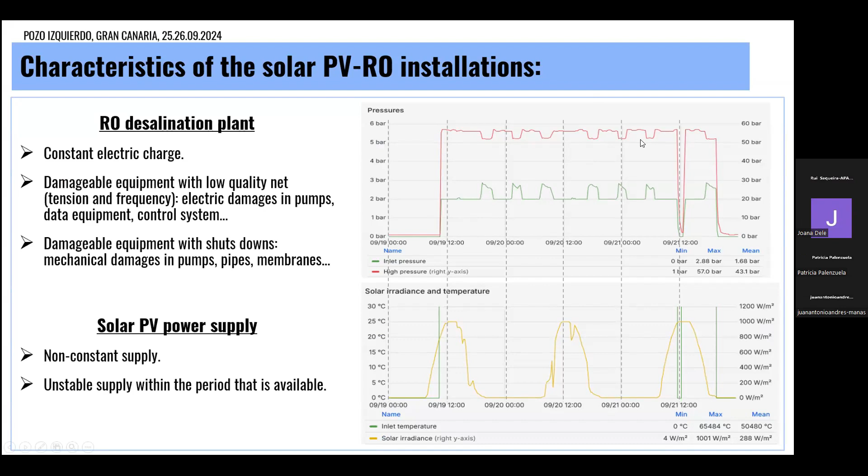If we take into account the PV, the reverse osmosis is a constant charge, you can see it here. So we have this small desalination unit that we have here in Pozo Izquierdo, and this is the high pressure pump. We have a constant charge as the desalination unit is working. This is the intake pump.

On the other hand, in the PV solar installation, we have this source available depending on the irradiation. So how can we match this, having a constant charge with a non-constant and non-stable energy source?

On one hand, we have equipment within the solar desalination unit that is very sensitive to low quality of the net, with tension and frequency, so we can damage our pumps or control system if we don't have a good quality net. We can also have physical damage to our equipment, like in pumps, if we do starts and stops, shutdowns and starts very suddenly, without controlling or doing it smoothly.

So what are the different possibilities? How can we match this constant charge? How can we supply a non-constant and non-stable energy supply without damaging our unit and producing the water that we may need? There are two main possibilities: off-grid installations and on-grid.

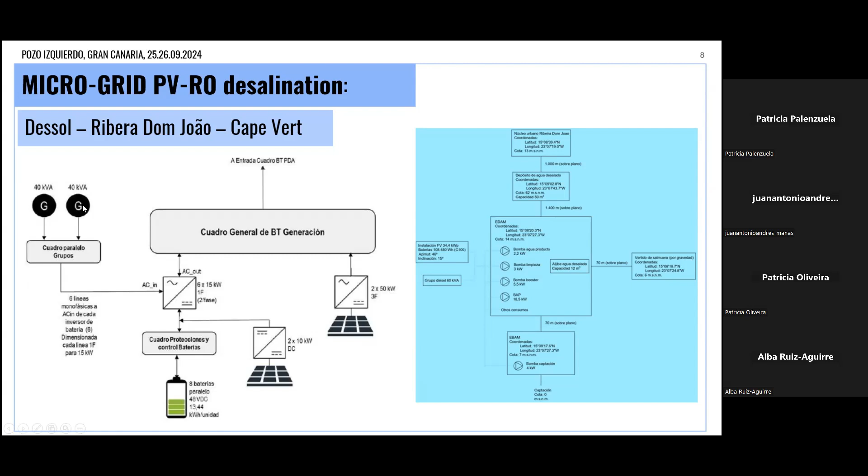And we can have external support either by engines or grid connected. There are different possibilities. On the other hand, we have a supply of PV source for the system itself, but this is the heart of the system. We need to create this microgrid because we have equipment that is very sensitive to low quality energy, either in frequency or intensity.

So what does this mean in reality? We have to create a three-phase microgrid, so we need three converters, three solars. And we need the PV power only to create it. Obviously, this energy will also be used for the desalination unit when needed, but it's not the priority. The priority is to create this stable microgrid.

And this is for a little unit of 120 liter cubes per day, so imagine if we scale up to 1,000 liter cubes per day, or 16,000 - it can be very difficult to achieve this with PV solar. On the other hand, we have these PV modules to supply the energy needed for the unit.

At the same time, all this equipment must be communicated through industrial systems, and this is not as easy as we can think, because all the equipment is commercial equipment, and they are not all built to be connected with different brand equipment, with different suppliers. So it takes time to do this configuration - it's not as easy as we could think.

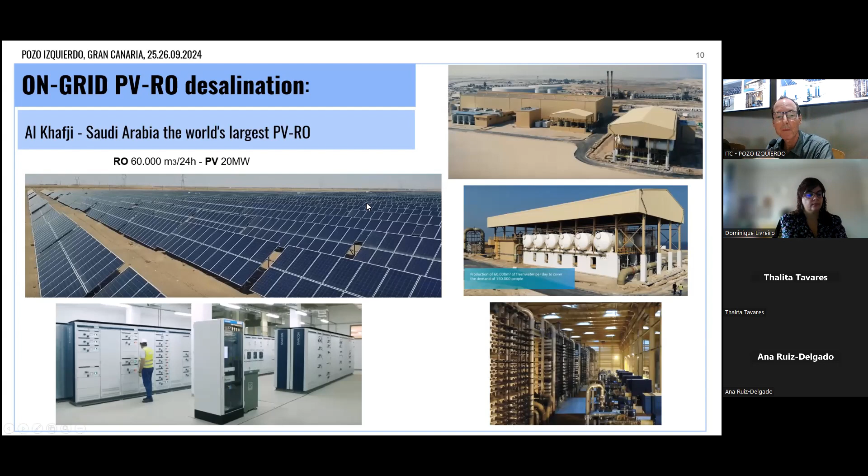But it's not the same idea as we shared before. You see the size of the desalination unit is enormous. All this is for the unit, the desalination plant, and for the PV system, but it's a part - it's not a whole system.

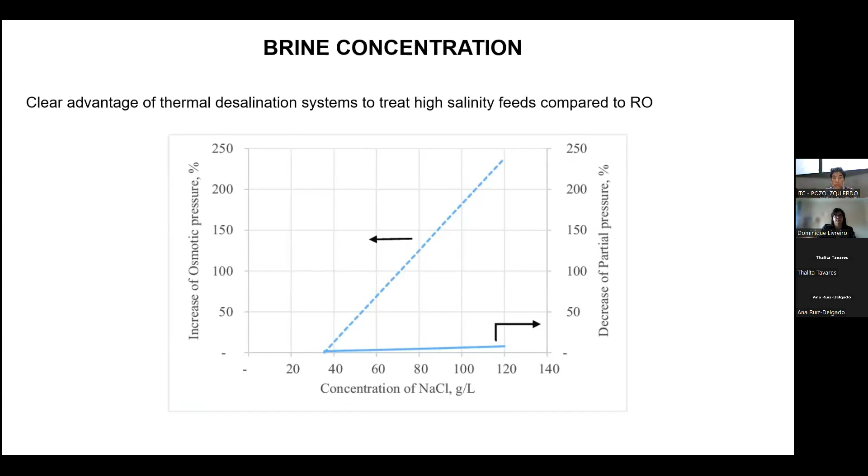with the salinity, so as salinity increases, the vapor pressure decreases much less. So thermal desalination technologies are less sensitive to the increase of feed salinity.

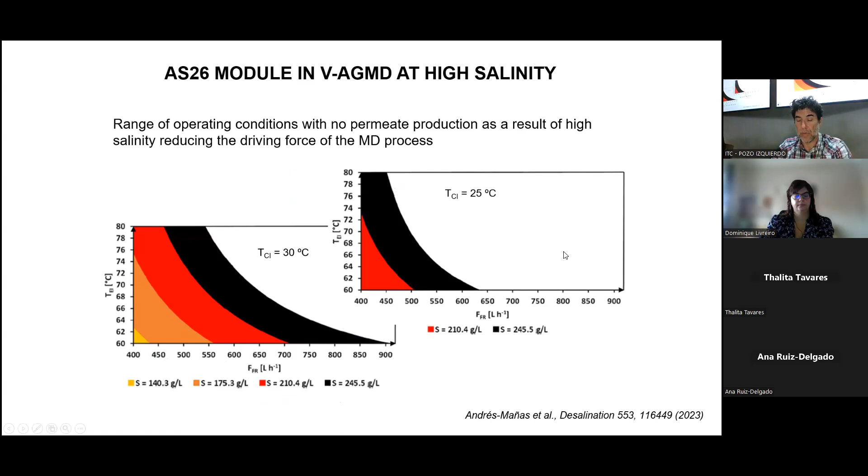So we need to operate at much larger feed flow rates. And specific thermal energy consumption, as an effect of the flux decreasing with the feed salinity, then specific thermal energy consumption increases. And we have an interesting effect that links with the previous presentation in the first fast track school.

And how do we reach this brine concentration? Operating in batch mode, so recirculating the feed. It goes out and then goes back again, so it keeps concentrating, because the recovery ratio in membrane distillation is low. It's typically not more than 10%. So we need to recirculate to achieve higher concentration.

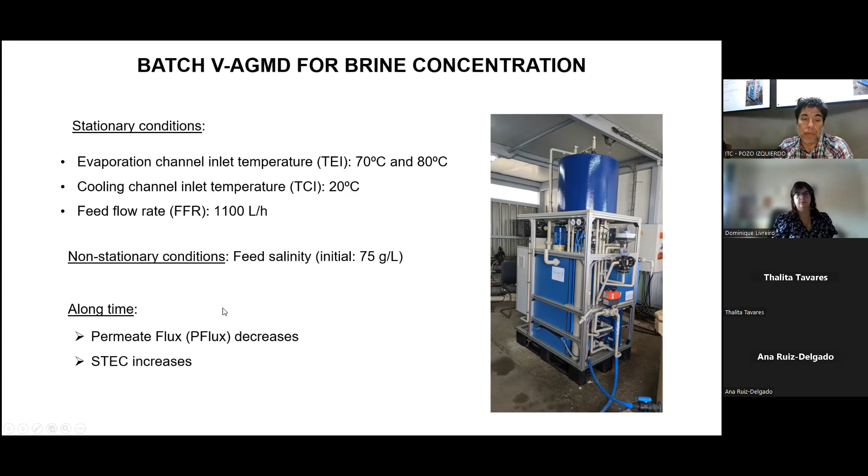And of course, the feed salinity is increasing. We start at 75 grams per liter. And over time, permeate flux will decrease and the specific thermal energy consumption will increase as an effect of the feed salinity. And we see here how the flux decreases.

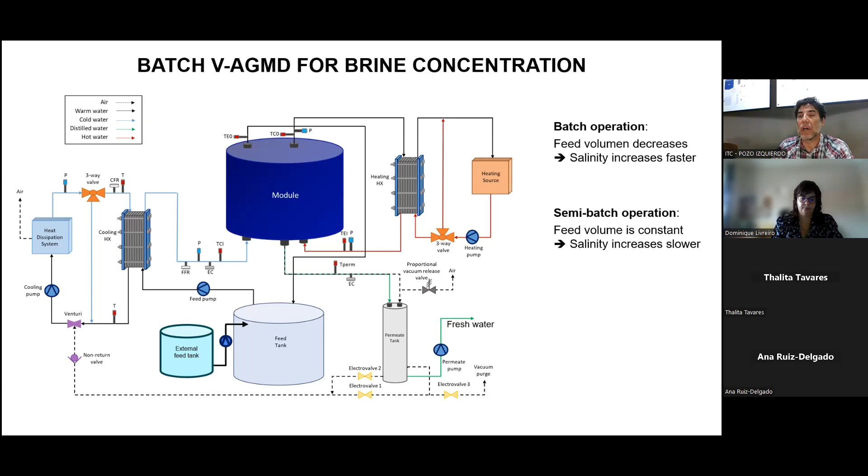And this is an interesting thing we did previous to the experiments in Evora, to see whether this would be a good strategy for brine concentration. We see it decreases the increase of salinity with time in semi-batch, because we are adding feed water, the 75 grams per liter, mixing it with the brine. And the flux over time, with salinity, we see that experiments take longer because it takes much longer to reach the final salinity, and then we have more added flux.

But of course, this is to check the permeate flux with salinity is most, and there's not a big difference. The difference is because of temperature, but it's not a big difference between batch and semi-batch. And the specific thermal energy consumption on the semi-batch is kept lower over time, again because the salinity increases slower.

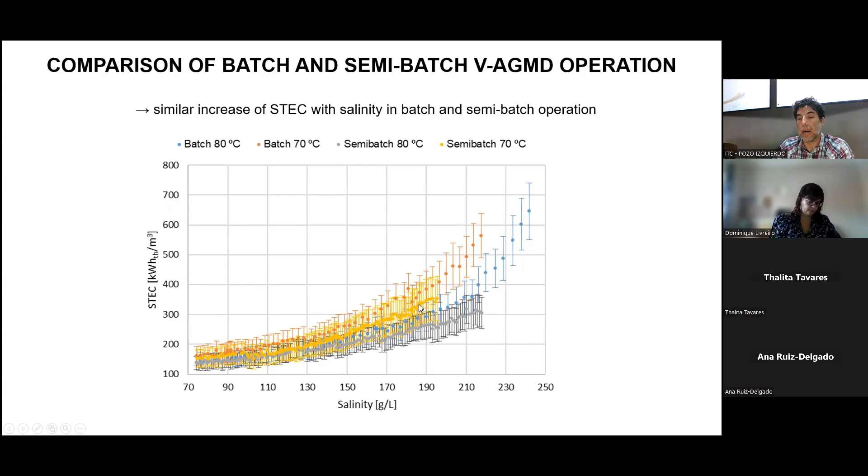And comparing with salinity, it's more or less the same for batch and semi-batch, though the error bars are large. And the cumulative specific thermal energy consumption is again kept lower in semi-batch. This is because of the flux, as you see the thermal energy demand is very similar between batch and semi-batch. So the difference is that the specific thermal energy consumption is divided by the production, by the flux.

So the results: if we want to reach a final salinity of 196 grams per liter, we see that in semi-batch we have more or less the same specific thermal energy consumption as in batch. We produce more, but we also need much longer time. And if the goal is to produce a certain amount of permeate, then we reach that amount in less time with the semi-batch operation, using less specific thermal energy consumption, although the final salinity is lower, again because we are buffering it.

So it's interesting to consider this semi-batch operation for brine concentration. It takes more time, but depending on whether we want to recover more water, this is a good way of doing it.

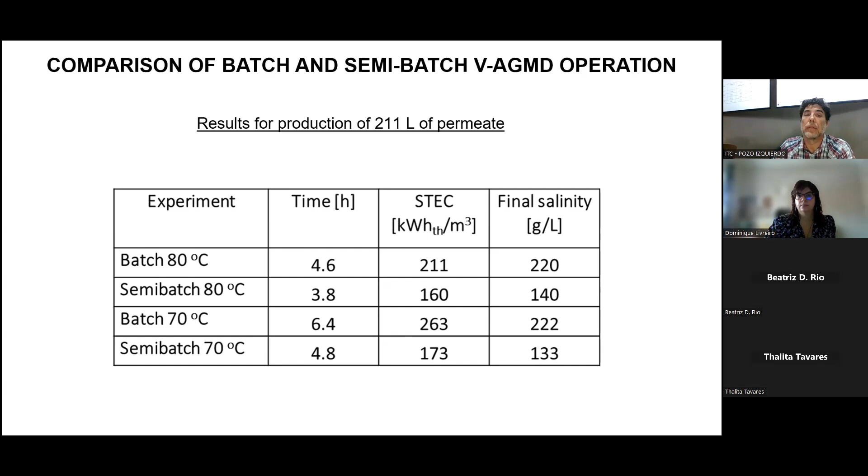And okay, this is now a comparison with osmotically assisted reverse osmosis. These are real results obtained experimentally for the vacuum enhanced air gap membrane distillation, for specific thermal energy consumption operating in steady state, or cumulative. The specific electric energy consumption was also calculated, and it's always less than 0.5 kilowatt hour per cubic meter. This is the cumulative specific thermal energy consumption over time, as salinity is increasing.

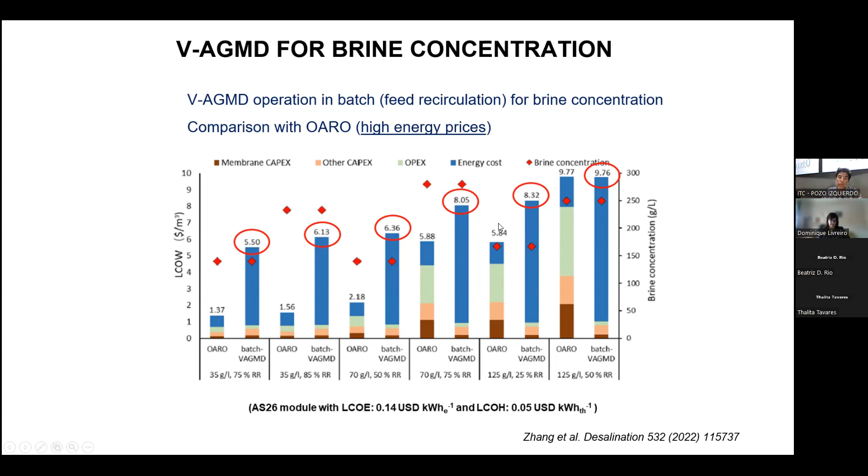But this is calculated with simulations. We don't have real data of osmotically assisted RO when we did this comparison.

We evaluated this compared with the rest. All these are spiral wound modules, comparing flux and GOR, and here we have this 4 effect unit: very large flux, but of course the energy consumption reflects 4 effects. It cannot have a GOR larger than 4. We would need to increase the number of effects to reach the specific energy consumption of the long residence time spiral wound modules, but we have a very large flux comparable to the short air gap membrane distillation spiral wound modules. So this merits a comparison for brine concentration in this scheme.

This is what we did in the Intelwatt European project, which is about finishing this month, treating high salinity brines from a mine effluent. It was a combination of reverse electrodialysis and membrane distillation, but I won't get into detail of this project. You can find it on the internet.

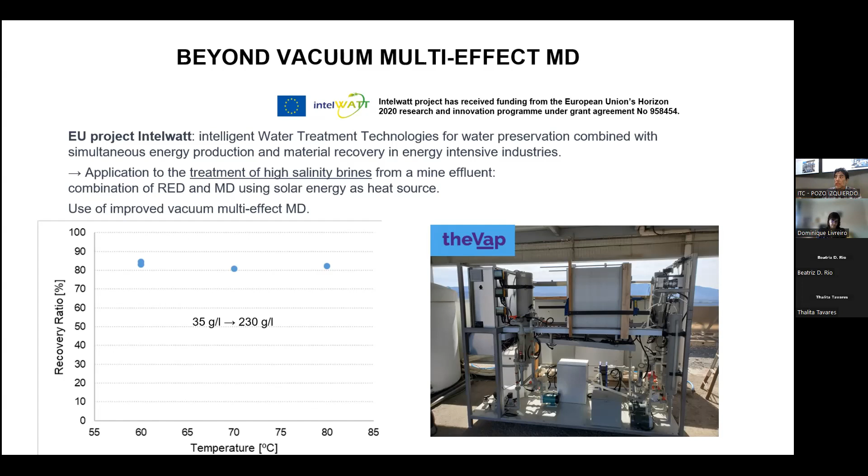That's the next step. We have already tried with graphene oxide to improve the membranes for more resistance to fouling. This is work done by the University of Manchester, adding graphene oxide layers to membranes, doing the usual fouling experiments over 72 hours.

How are we on time? You have 15 minutes. All right.

A long run of 72 hours, then rinsing with hot water for 30 minutes is the typical experimental fouling protocol. With PVDF membrane, the Durapore commercial membrane, we see we have foulants, of course. We have humic acid and paraffin oil, and we see the flux decreases because there is fouling. With PVDF with PDA, it's more resistant, but still you see a decrease of the flux.

And with the graphene oxide, the flux is kept more constant. So there is an increase of fouling resistance using graphene oxide, and the flux decay due to fouling is mitigated. There is some membrane wetting, but membrane wetting is reversible.

So this is what is going to be tried in the next months using this facility of the Intelwatt project: first, the graphene oxide membranes, and meanwhile we will work on changing the module to a membrane-less module, so we can have less resistance. It's more like a multi-effect distillation plant, based on thin layer operation.

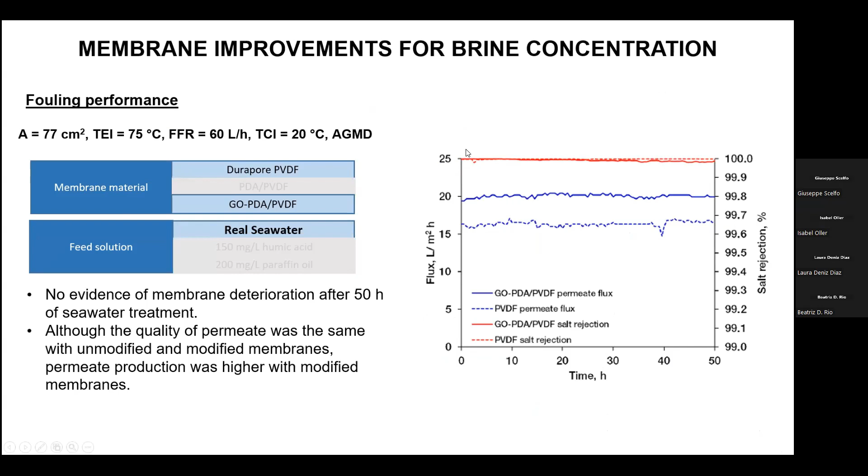Okay, this is the summary of the conclusions of the tests. With graphene oxide, we see the flux is larger and kept quite stable a long time. But this is what is important in our context: using solar energy, we want the highest thermal efficiency of membrane distillation.

Here we are comparing the different membranes: the polyethylene membrane, which is the standard membrane used by the Aquastill modules, the PVDF membrane without graphene oxide, and with graphene oxide. We see an increase of flux constant for air gap and also for vacuum enhanced air gap, a decrease of the specific thermal energy consumption, quite significant for the vacuum enhanced air gap membrane distillation, and the salt rejection factor is also increased.

One of the issues with vacuum assisted air gap membrane distillation is a slight decrease of the salt rejection factor, because of the effect of the pressure. On the other side, there is a negative pressure that pushes against the liquid entry pressure of the membrane. With vacuum and graphene oxide, this is mitigated, and we can keep the same salt rejection factor as in air gap. So that's another advantage of the graphene oxide coatings.

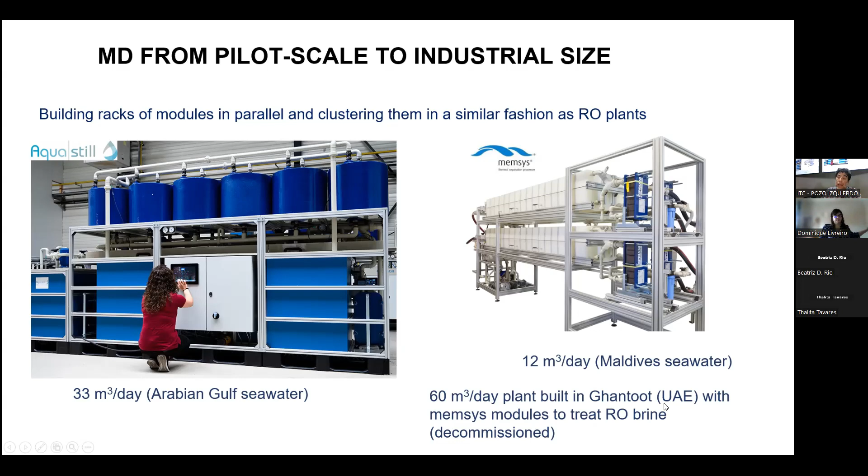And with hollow fiber modules, this is a funny story because Korea wanted to have a large membrane distillation plant, but with their own technology, and they only can build hollow fiber modules. So they have this very large plant, 400 cubic meters per day with hollow fiber modules. They don't have internal heat recovery, so the energy consumption is crazy.

They have covered it with steam ejectors to recover some part of the heat, but it's not really feasible. They have good fluxes, but the energy consumption is very large. They operate with vacuum and thermal vapor compression.

Okay, coupling membrane distillation with direct solar heat. There is a lot of work now advancing state of the art on this concept. That has the advantage that you save on solar collectors and reduce the thermal losses of membrane distillation. The idea is that the feed water is heated directly by the solar radiation, so you integrate a membrane in a solar collector. This has been done with several configurations: vacuum, direct contact, air gap, or even vacuum-assisted air gap, and also with hollow fibers.

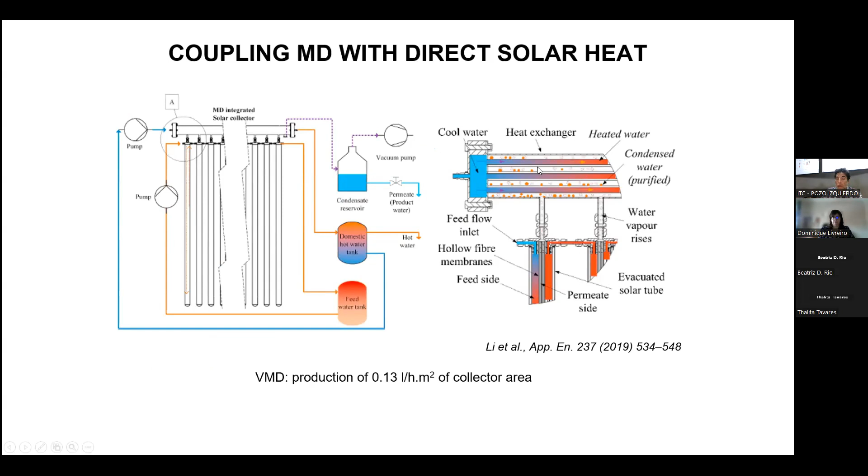This configuration is with evacuated tube collectors. We introduce a membrane in an evacuated tube collector, and in this case it's vacuum membrane distillation, but you can have it also with direct contact. You have the membranes inside, and this is an evacuated tube collector. Well, in this case, not evacuated because there is liquid inside. So this is like a CPC.

The problem here is that the solar collection area is restricted to the membrane area, and the velocity required for heating in a collector is much lower than the optimum velocity at the membrane surface. So there is going to be a problem if you operate at the velocity needed to reach the required temperature. Then, by operating at very low velocity, polarization on the membrane is going to kill you.

And if you operate at the right velocity to avoid the polarization, then you don't have physical time to heat up the feed. So the solution is you need to extend the collection surface without membrane to have some preheating and then reach the membrane surface.

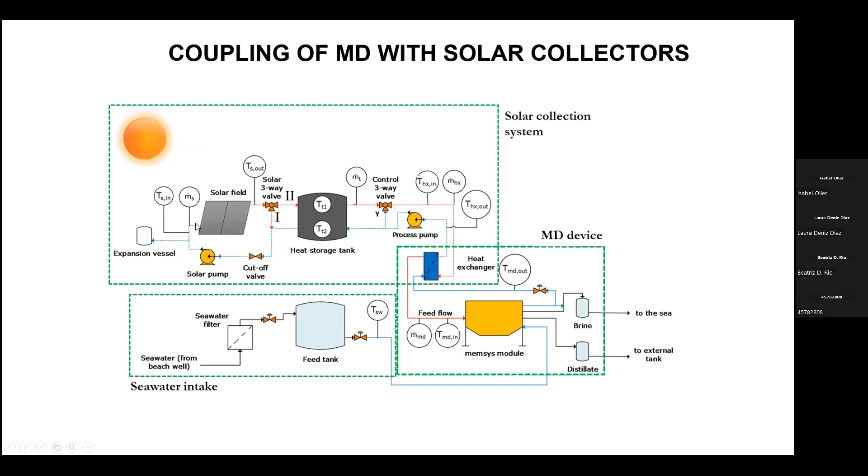So you're not really avoiding a collector because the membrane is only one part of the collector. So that's not really saving. And you're losing the capacity of buffering, which is the big advantage of having a separate solar field with a heat storage tank. You can buffer the feed and operate at constant or more stationary feed temperature. And this is a big advantage that is gone with the direct solar membrane distillation.

So I think there's a lot of research going on that, but I don't think it has good prospects, and we should stick to our concept of having a separate solar field and a separate membrane distillation operating at their own optimum conditions, and then the interface, which is a heat storage, a heat exchanger, and the heat storage that allows to play and optimize the operation and get the most of the solar field.

Another interesting concept is coupling membrane distillation with heat pumps. Why? Because we need heat and we need cooling, so we can integrate a heat pump. In this concept, you have solar energy and the cooling required for the membrane distillation. So this is an absorption heat pump coupled with a membrane distillation unit.

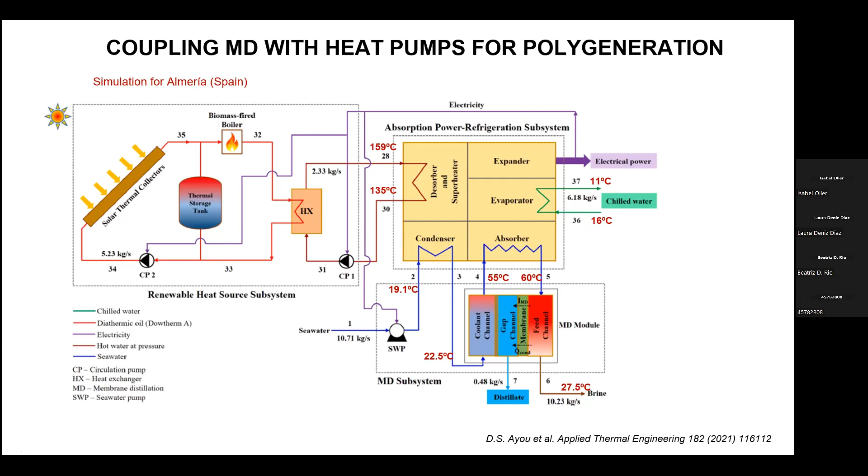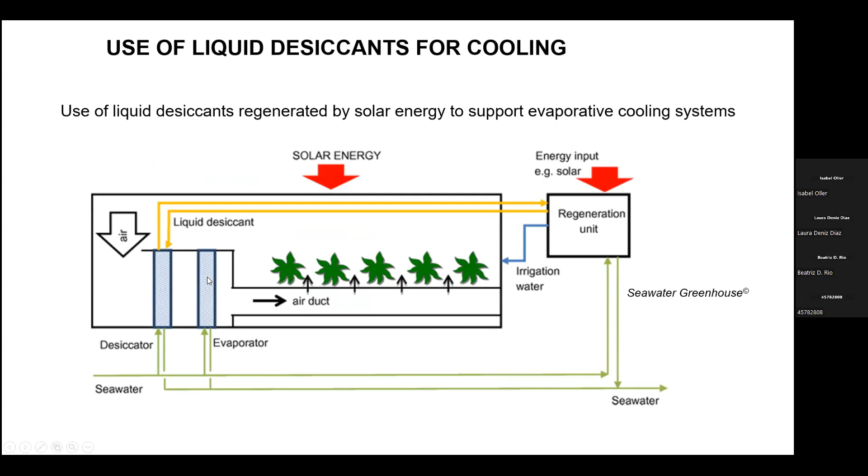And there are also the concepts of solar absorption cooling. Chemical absorption has been proposed for solar cooling using saline solutions regenerated by thermal desalination technologies. Here liquid desiccants come into play, and we have used them for evaporative cooling and regenerated by membrane distillation. This is in the context of the seawater greenhouse, where we did a theoretical study of using a liquid desiccant regenerated with solar-powered membrane distillation.

The problem is that the solutions that work well as a liquid desiccant are those with the lower water activity, and they require the highest energy for membrane distillation. So there is this problem: calcium chloride and magnesium chloride have low water activity and low flux in membrane distillation, whereas when the water activity is high, like sodium chloride, then you have a much larger distillate flux. So it's not the perfect marriage, but it's something that can be studied for liquid desiccants.

There are other alternatives for solar cooling combined with membrane distillation that we could study, and then we stop here. There are also applications of membrane distillation for regenerating industrial solutions and for hydrogen production, green hydrogen. But I think we saw the green hydrogen in the first edition of the course, and the industrial wastewater work was done by Alma, who worked a lot on that, but I cannot present it. And this is the people that have worked on these topics of this presentation. Any question, I'll be happy to answer.

I have one question. You have concentrated the information in the presentation. I wanted to ask you about perspectives: how do you see the possibility of further reducing energy consumption in membrane distillation? There is a driving force, a temperature driving force, which somehow limits the lowering of energy consumption. Is there any hope that new membranes or new configurations may help reducing this driving force to enhance efficiency?

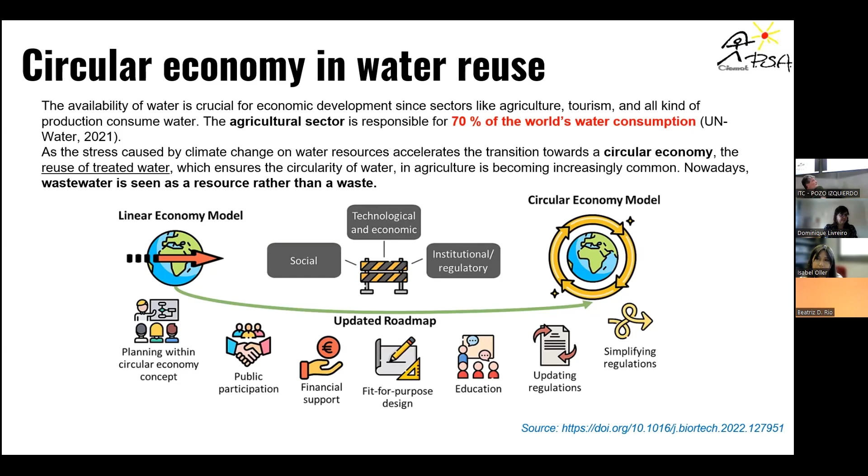And that implies taking into account different actors, not only from the technical and economic point of view, but social engagement and the institutional and regulatory framework is also highly important in this issue. There is a new circular economy action plan launched by the European Commission, in which they connect the agricultural, industrial, and municipal systems, in which water is everywhere, let's say. And of course, water reuse in agriculture is included in the food, water, and nutrient product value chain in this new plan, so it's highly important.

There are a lot of barriers that prevent the widespread use of reclaimed water in agriculture: technological, economical, institutional, and social barriers. There are many actions being done to overcome these barriers, but I would like to draw your attention to how important education is, not only regulation, but also social education and public participation, as important actions to achieve wastewater reuse, at least in Europe.

For that reuse, we have water microbial contamination that we have to tackle. It's not only the presence of bacteria, viruses, protozoa, and the stomach problems and cholera problems regarding E. coli and the presence of these water pathogens when we use wastewater as a water source.

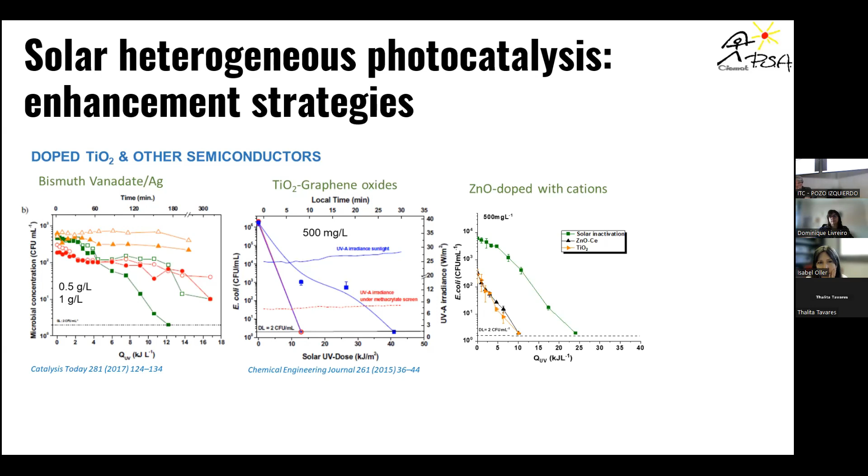The next presentation, I think, will go deeper into this, so I won't go further, just leaving you some examples of these nano-semiconductors being developed nowadays. But the thing is, as I also said in the first Fast Track school, there is not yet any new photocatalyst developed or synthesized with better performance than titanium dioxide.

So the future in heterogeneous photocatalysis would be the immobilization of these photocatalysts in some supported materials, allowing us to use the nano-photocatalysts without them being diluted or in suspension in the water, which would require separation.

We have been working a lot not only with titanium dioxide but also with iron in a zerovalent form. Some people are working on giving a second use to wastes that are rich in iron, which can be used as zerovalent iron, working as a heterogeneous phase.

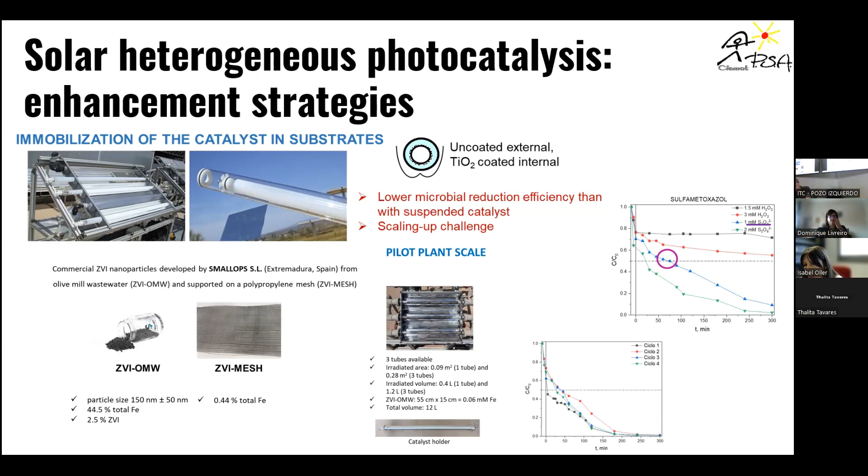So the important thing with this kind of supported photocatalyst is that you can reuse it without removing the catalyst and the support material. In the graphic below, you can see the reuse of this mesh over 4 cycles, and more or less the efficiency is maintained.

Another advance, or step forward, is the state of the art use of oxidants for UV systems already installed in wastewater treatment plants, or new solar systems, solar photoreactors, which we'll discuss a little more later.

So the idea is that if we add hydrogen peroxide, even chlorine, persulfate, or peroxymonosulfate, we can produce other radicals besides hydroxyl radicals, like sulfate radicals or chloride radicals. These may not be more energetic than hydroxyl radicals, but similar, though more stable in water, so we can get better results in the medium to long term.

So when we use chlorine or UVC, which are the state of the art and commercially available technologies, we can produce toxic intermediates like trihalomethanes and haloacetic acids, which are carcinogenic.

But if we combine solar energy with UV and free chlorine, or instead use persulfate or hydrogen peroxide as oxidants, we can eliminate these trihalomethanes, these intermediate products, as soon as they are produced. So we can go further and improve these systems, always considering what is already installed in wastewater treatment plants and taking advantage of it, which normally is UVC and ozonation as tertiary treatment, or nowadays already quaternary treatment for disinfection.

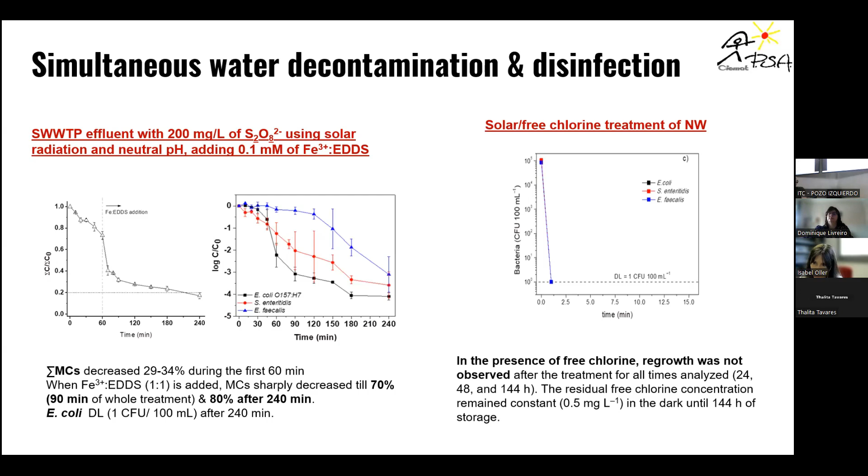There are also some advances or improvements in the solar photo-Fenton system - this is homogeneous photocatalysis. We have iron and hydrogen peroxide, so we produce hydroxyl radicals in the bulk of the reaction in the water. We don't need to separate anything because this is not a heterogeneous phase, it's homogeneous. The thing is that normally the photo-Fenton process is optimum at acid pH.

So when we are thinking of applying the photo-Fenton process for the elimination of microcontaminants in the effluent of a municipal wastewater treatment plant, reducing the pH and then increasing it afterwards seems to make no sense, using reagents like sodium hydroxide or acid, which would be an extra cost for the reagents.

So if we use a complexing agent, such as EDDS - here I leave you some of them, could be EDDS, EDTA, oxalate, citrate - there are a lot used and tested in the publications in the bibliography. We can trap the iron and avoid its precipitation at neutral pH, so then we can apply the photo-Fenton process at neutral pH.

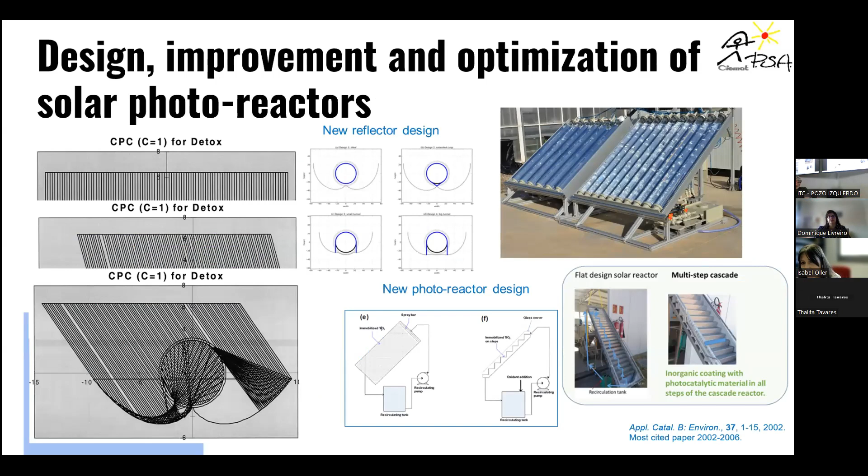Just to let you know the advances in the state of the art in photoreactors - as you can see on the right-hand side, there are multi-step cascade photoreactors that are open photoreactors. The other advanced photoreactors my colleague Lena is going to speak to you about, so I'm not going to enter into that here.

But I wanted to speak to you about the raceway pond reactors, which mainly come from our collaboration with the University of Almeria. These are low-cost photoreactors that can be easily used when you want to treat with solar energy and some oxidants at a bigger scale and with less cost, for large amounts of effluent from a municipal wastewater treatment plant.

Just to finish with the example I told you, I leave you this - I'm not going into depth, just for those interested you can contact me after - but this is a demonstration project in which, with Esamur in the Murcia region in Spain, we have put together a demo site focused on the integration of three systems: an upflow anaerobic sludge blanket system, vertical and horizontal wetland, and then the raceway pond reactor for the quaternary treatment.

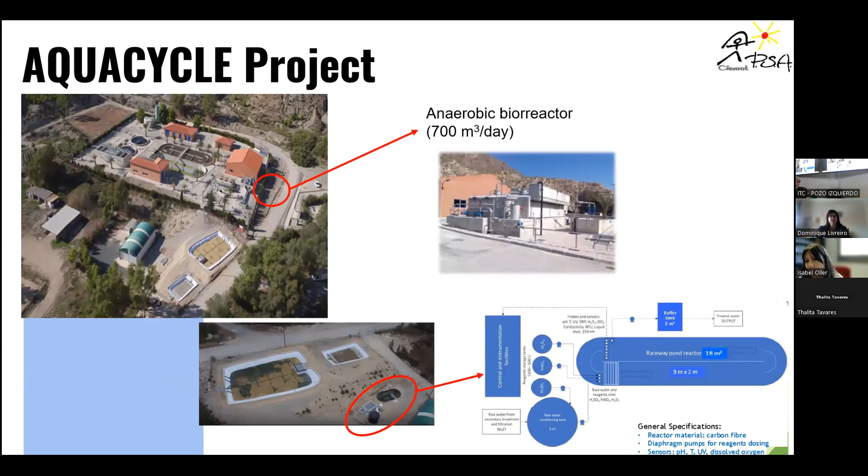So these are some pictures of the facility, and here you also have the raceway pond reactor for treating up to 5 cubic meters per day of water. These are the contaminants and microorganisms we have followed, and this is quite new. I leave you only the results here to let you know which pathogens we have inactivated.

The oxidant that we have mainly used is hydroxyl, so hydrogen peroxide to produce the hydroxyl radicals. This is the pictures of the wetlands and raceway pond reactor.

We have obtained the elimination of 50% of the contaminants of emerging concern, and we have also attained the disinfection process. I leave you here the results also, mainly to let you know that we have effective treatment and no regrowth of bacteria after 48 hours of stop.

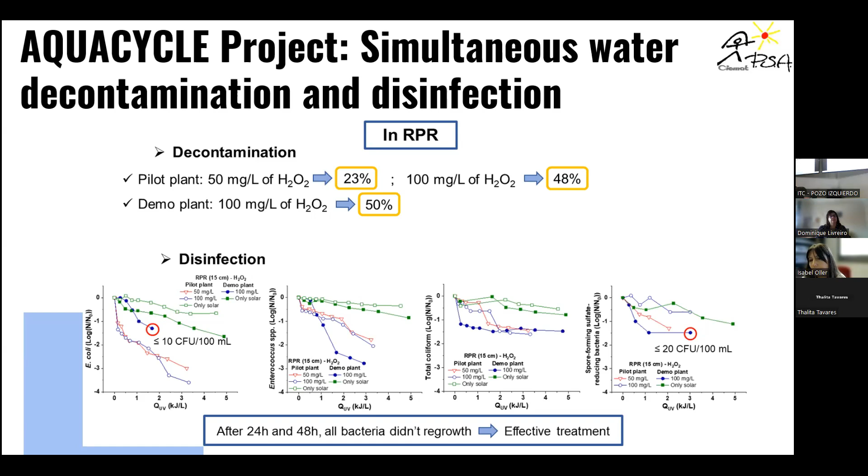The first one is again about perspectives. First of all, is there a kind of design criteria, in terms of, for example, milligrams of removed contaminant per square meter of collector? And if so, are there numbers or figures for the current collectors, and target figures for future scale up and full scale implementation?

That's a very good question, Andrea, thank you very much. As you know, there are not so many ISO rules or protocols well established yet for the wastewater or reclamation wastewater field. But yes, we already have a lot of demo sites, and we have those numbers. We can establish the target of microcontaminants and pathogens to be eliminated, and even the amount of oxidant that will be required. We have also been working in semi-batch, semi-continuous flow.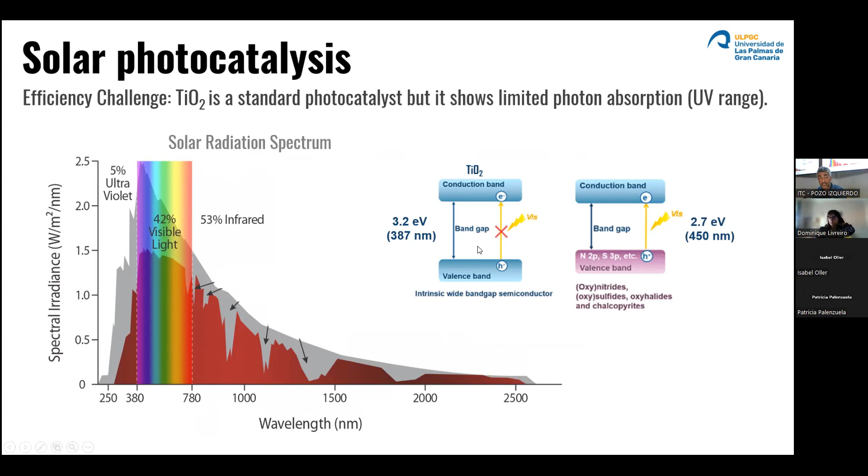There's been a lot of work done in photocatalysis materials strategies to try to reduce that band gap and be able to harvest photons in the visible range, which is about 42% of the photon emission spectrum. There's been quite a lot of strategies done to manipulate materials to try to take advantage of these low energy photons. These are the typical examples, if you want.

Doping was mentioned also in Isabel's talk. What it does is introduce stepping stones in that kind of bridge, so the photons can use it to jump, and then you don't need that much energy anymore to reach the conduction band. There's loads of them. You can play with the stoichiometry of materials to try to reduce those band gaps, because they are affected by the chemistry structure and all these properties.

You can also use dyes on the surface of the materials that can absorb visible light photons and then transfer them into the semiconductor. So there's loads of these kind of strategies. Heterojunctions are actually very popular. There's two different materials, two different semiconductors that join together. They both hopefully absorb photons, or at least one of them does, and what they can do is separate the charges efficiently, the electrons and holes, so that you can have them in different places and there's no recombination. So you increase the photocatalytic efficiency.

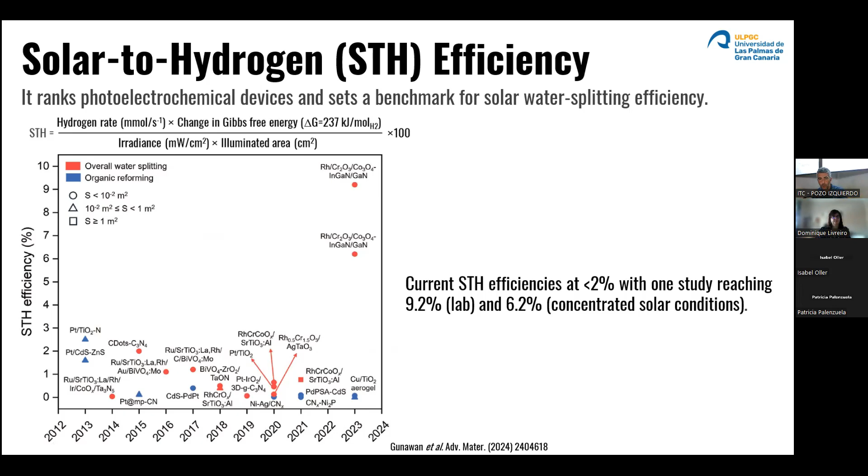There's one example of efficient production for hydrogen in here, which is actually the same paper. They claim efficiencies of 9.2% in the lab - that's with intense lamps - and 6.2% for concentrated solar. I'll give you a bit of this flavor as you will see the example for hydrogen in here.

I didn't know there was sound, but I will show you what they're doing there. It's actually rhodium chromium oxide, supported on indium gallium nitride substrate. That's for the hydrogen evolution, and then there's also cobalt oxide for oxygen evolution.

You can see the filtered light in there. You can see all these bubbles. Don't ask me how they separate the hydrogen and the oxygen - it looks like they evolve in the same vessel. And certainly the materials, both sides of this hydrogen and oxygen, are all on the same kind of nano needles, nano wires, they call it.

You can see the changes in band gap as you dope gallium nitride with indium, and there's actually heat involved as well. They say there's an optimum temperature at 70 degrees, and above that temperature, apparently, you enhance the recombination of hydrogen and oxygen. The test lasted 74 hours.

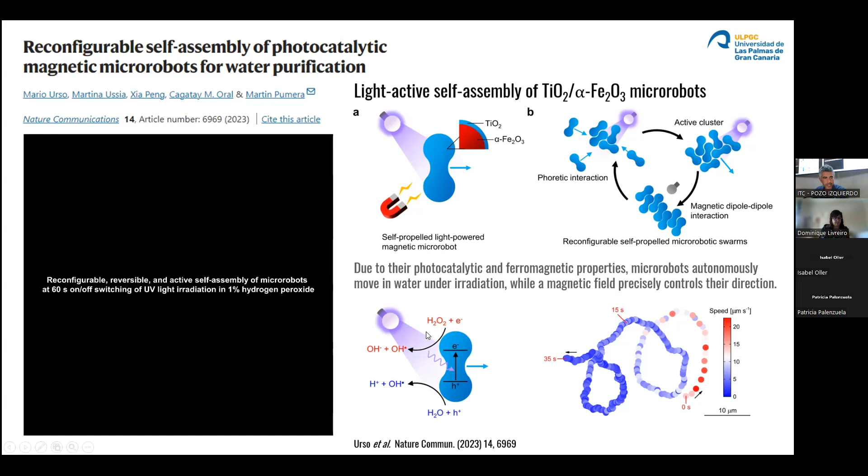I actually quite like this, not because it works, but because it's fun. They created this in Nature Communications: robots that activate by light. Hopefully it works - you can see, light on, they move around and do these things. These guys are very serious, they even check how they move and where they are within 15 seconds. Turn off the light, they stop; turn it on again, and they move across. They use ferromagnetic properties as well as photocatalytic properties to move around and clean the water, helping mass transfer, and then you can collect them back again with a magnet.

They say the micro robots autonomously move in water under irradiation, while a magnetic field precisely controls the direction. I don't think that was very precise, but it looks fun and cool. Hopefully this kind of work will continue. You can see here the efficiency of degradation for dichlorophenoxyacetic acid. It's a good excuse to develop these kinds of ideas, and that's actually, from my perspective, the most advanced engineering in water treatment that has nothing to do with hydrogen evolution so far.

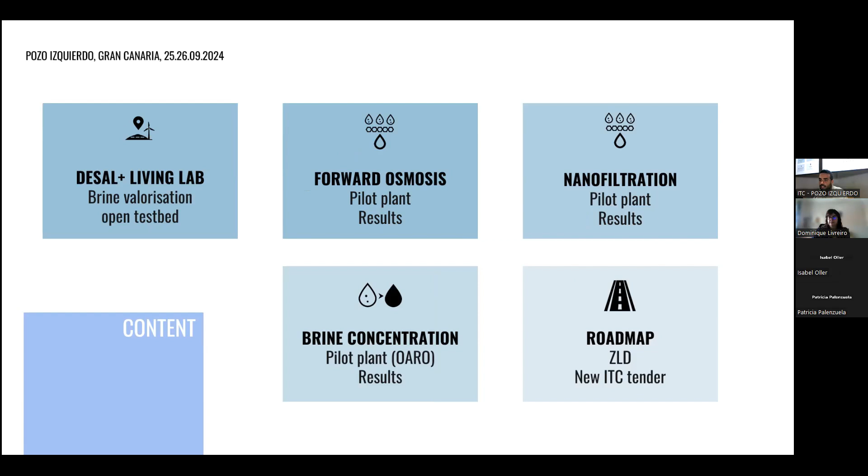This is going to be the content: a brief overview of the DESAL+ Living Lab and the brine valorization testbed that we're going to see later today and tomorrow in depth with the people in group 3. Then we're going to go through the pilot plants belonging to this brine valorization open testbed - the forward osmosis, the nanofiltration, and the OARO, the osmotically assisted reverse osmosis brine concentration plant - and finalize with our roadmap for the near future.

So the DESAL+ Living Lab, I'm just going to be very quick here, but it's a fully equipped public-private system. It's formed from ITC, the Society of Economic Promotion Gran Canaria, the 2 universities, Las Palmas Gran Canaria and La Laguna, and the research agency of the government of the Canary Islands.

It's been running since 2017, and it's a leading hub of skills and innovation in desalination and the water-energy nexus. The infrastructure is mainly located in Gran Canaria and Tenerife, but also on the west African coast and in Cape Verde.

Starting with the pretreatment, where you purify your brine, mainly to get rid of divalent and multivalent ions that will reduce the efficiency of the further steps. But you can also obtain some byproducts from this pretreatment stage, which makes it a crucial and very important stage in the overall scheme. Then you have the concentration stage, where you treat your purified brine and concentrate it as much as you can.

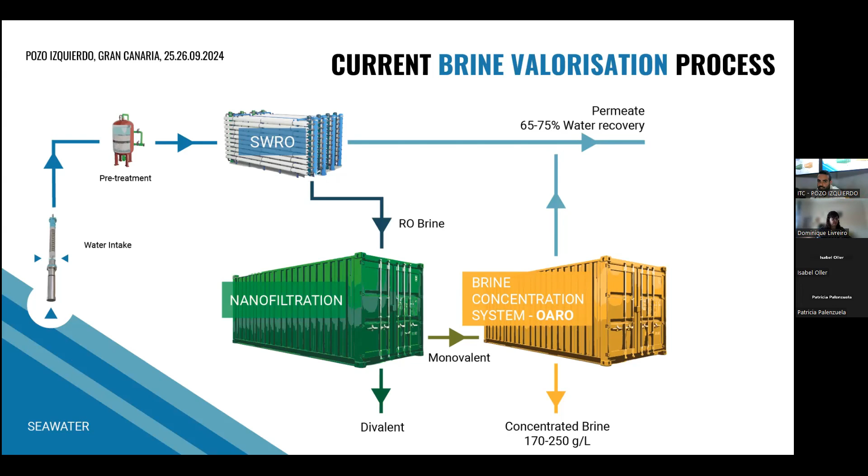It needs to be installed because it was initially somewhere else, so we just brought it here last week actually. We're going to see it tomorrow, but it's not connected yet.

What we are aiming with our brine valorization open test bed is not just for us to develop and optimize the technologies and do our own research, but also we can offer services inside the brine valorization open test bed, and we have different desalination brines. Anybody with technologies that want to test them in a real environment can come here and test their pilots.

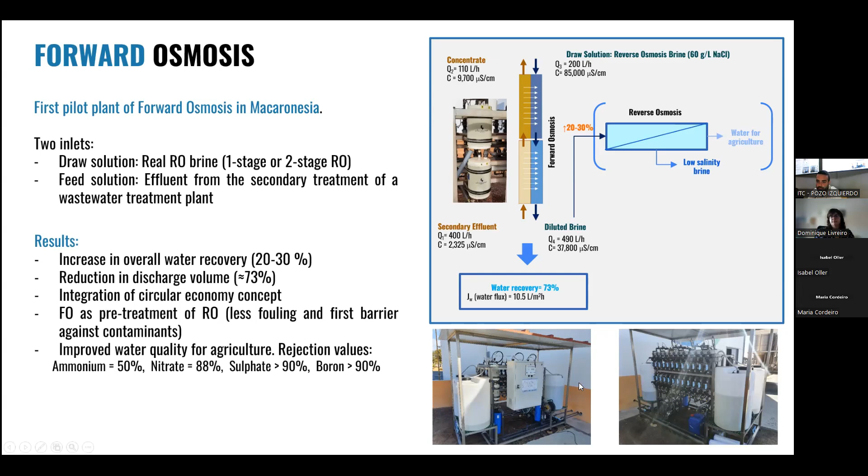These are some pictures of the pilot plant that you will see today.

So we are looking also to increase the research infrastructure in the Canary Islands. We are not only operating this from the Canary Islands Institute of Technology, but also the University of Las Palmas de Gran Canaria is involved. Several students have come doing their master's degree thesis, I think 2 or 3 of them. So that's the idea, to try to increase this research infrastructure in the Canary Islands.

Then obviously we have synergies to explore, not only with wastewater plants, but also with biotechnology. We have another department here at ITC, which is biotechnology, and we have a project in mind where they can make use of the concentrated secondary effluent. I don't have a scheme, and it's difficult to explain all the connections, but it's quite an interesting project, and we would like maybe next year to start working on it.

And this is just some of the results obtained with water recovery. I must say that all these results have been achieved...

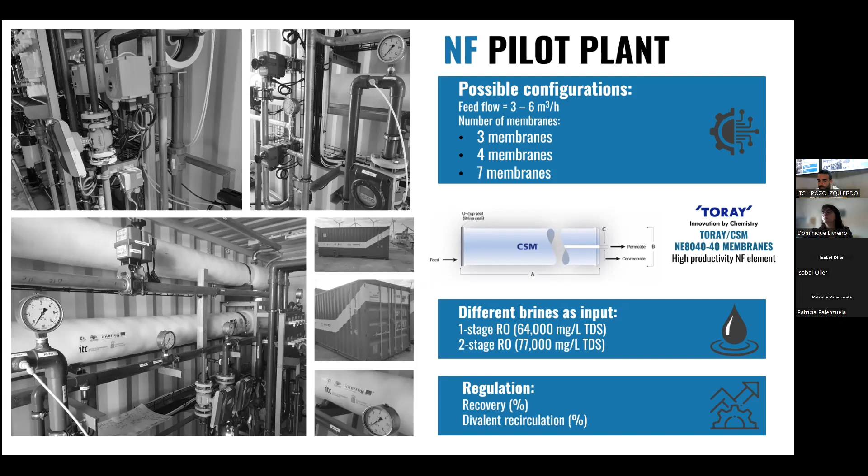That's very exciting. We have different brines, as simple as I mentioned before - the one-stage RO and the two-stage RO. You can see the difference in composition. And we can regulate how it works by selecting different recovery values and different percentages of the divalent recirculation. So what we thought in the design was to make it as flexible as possible to achieve different results under different circumstances.

It's a robust system with replicable data, low energy consumption, considering that we are not using any energy recovery device at the moment, but it will be used in the near future. We are already working on that area, and we know we can use some devices being developed for low pressure and low flow, which is going to be very interesting.

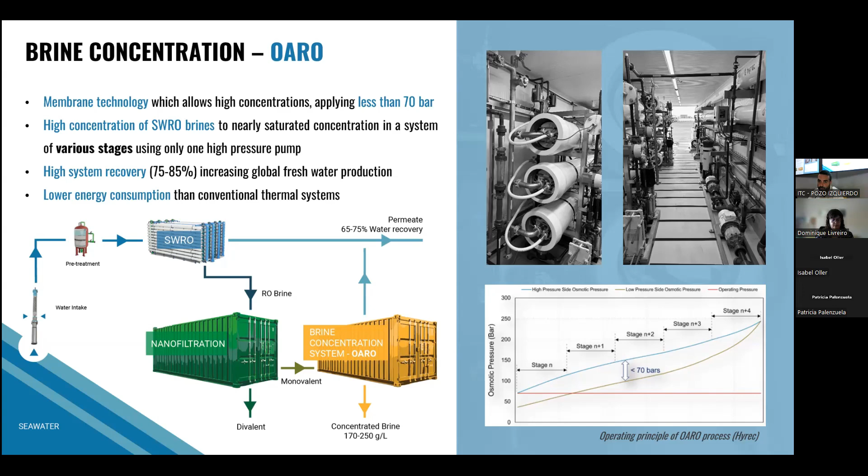And we apply only a pressure of less than 70 bar in the OARO system. We just work with one high pressure pump, and well, there are some boosters, but low consumption.

This is the disposition of the 3 different stages inside our container. It contains an RO membrane system that generates more permeate and acts as a pre-concentration. Then it goes through the different stages where we recycle some of the concentrated brine to allow the pass of water, the water flux.

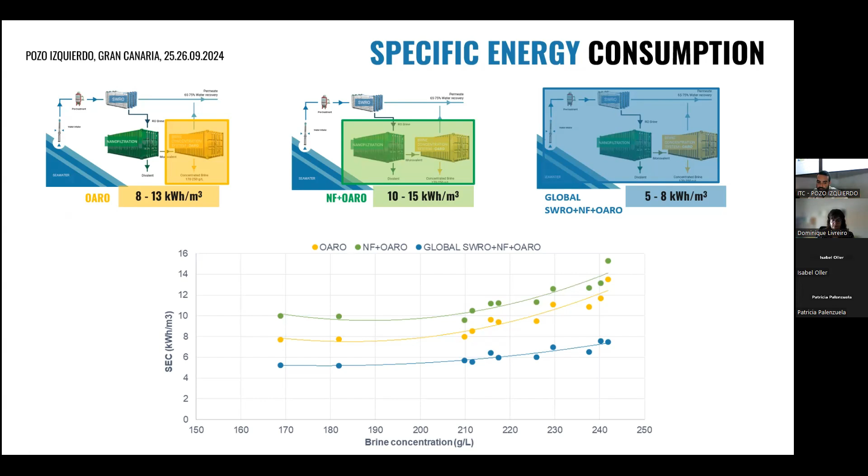If you add the nanofiltration system to it, because usually what you're going to have is the RO brine, then this is the energy consumption, and then the global system from the input to the outlet. This is the energy consumption required.

And I'm just going to finish with a roadmap. Well, this is what we get now. I think we have explained this, and I don't have more time.

So our roadmap for NF: we have magnesium and calcium inline analyzers from Hach, and we have a collaboration agreement with them. We're going to do a lot of research about this, analyzing on site what's happening, and how any change that we do to the system affects those specific values.

We're going to use the 2-stage RO brine as feed. We're going to test new membranes. We're going to focus also on the NF divalent valorization and doing long-term tests.

With the OARO system, our brine concentration system, we're testing different feeds, long-term tests, energy recovery device implementation, solving an issue that we have with high temperature when you want to reach high concentrations, and then the anti-scale optimization.

And in the global scheme, we would like to explore an extra purification stage, finding the optimal configuration to minimize energy consumption, and optimal OARO design for variable brine compositions.

And also, we're going to launch a new tender next month, hopefully, about a new conversion technology that will close the cycle and that will produce some valuable products that can be used in the Canary Islands and are needed.

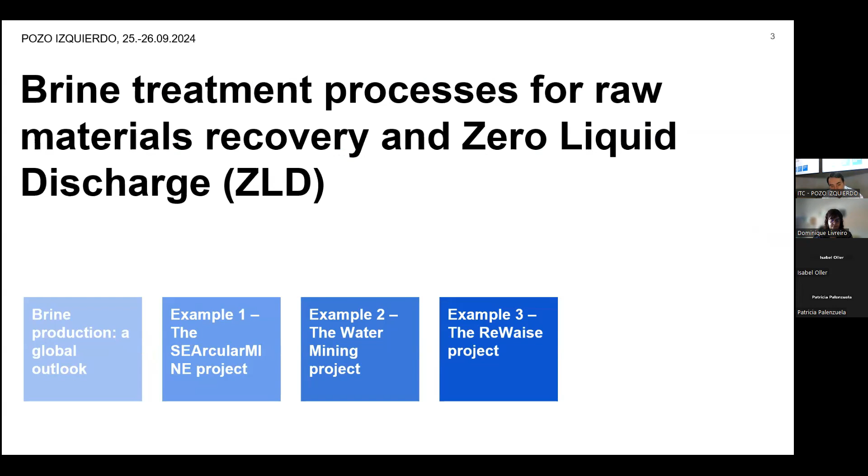I will be showing basically three examples related to three different research projects we are currently involved in, and I think they will provide different possibilities. For sure, we know very well what is the problem of brine resulting from the desalination process, from seawater reverse osmosis desalination. Quite large volumes are produced, larger than of course the desalinated water itself. This is quite important to take into account, and even the fact that with a specific look at our Mediterranean basin, this is going to affect significantly what is happening in the Mediterranean area.

Well, the three projects I'm going to briefly summarize for you are SEArcularMINE, coordinated by University of Palermo, the Water Mining project, and ReWaise. I will go in a very straightforward way directly to the first project.

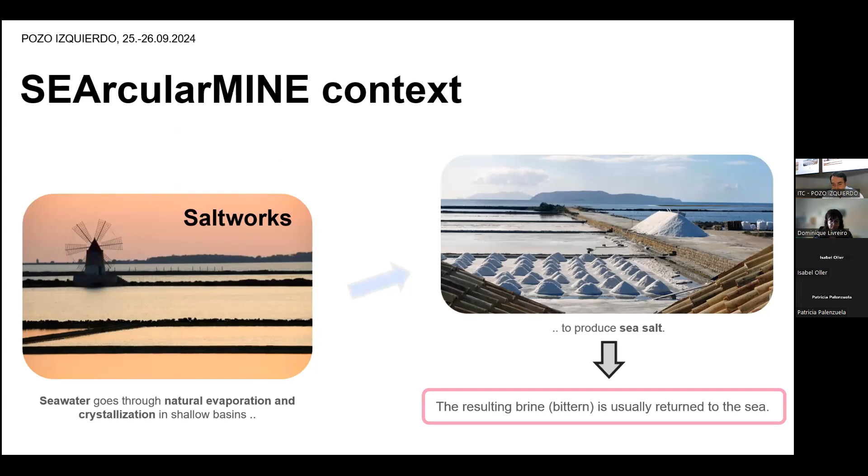The first project actually focuses on a specific kind of brine that originates from saltworks rather than from seawater reverse osmosis process. I think it's very interesting because it can be easily coupled with the desalination process. So let me explain what is this resulting brine, so-called bittern, from the salt production side. Sicily has, in Trapani, a typical example of such natural process that depends, of course, on specific conditions of the location—the presence of wind, the presence of sun.

And typically in many areas in the Mediterranean, these conditions occur, so I think it's something very frequently present in the Mediterranean. So the idea is that you start from this natural sea salt production site, the evaporation salt works, and what you get at the end of the process, after you produce the table salt, is a mineral-rich bittern. This mineral-rich bittern, of course, is very interesting—it's got a very high potential for valorization.

Particularly, the magnesium content is very high. But beyond that—magnesium is by far the largest component present in this solution—you can go and further focus on other elements such as lithium. So you can start an operation in terms of lithium extraction or other elements.

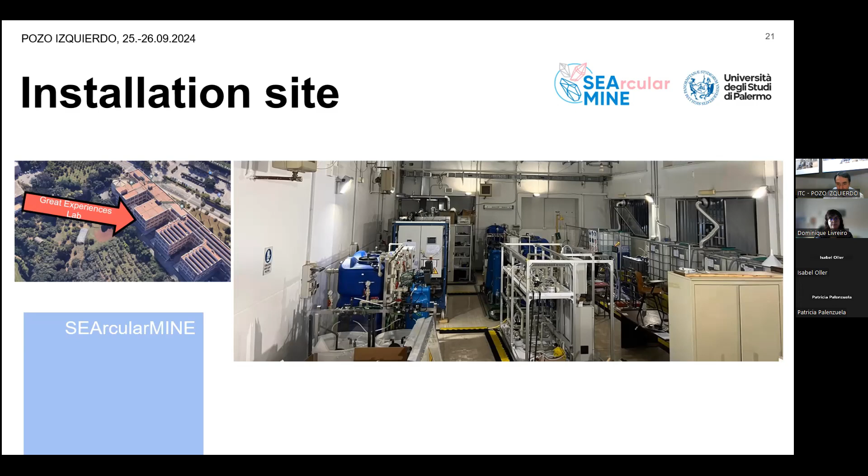This is just a short view of what was the installation site at the premises of the University of Palermo. This is the laboratory that we have in our building, and you can see some of the equipment and the different technologies.

I think the treatment chain, for example for the magnesium extraction, will be clear later on. It's a reactive precipitation step, so we will require sodium hydroxide, and we will also require the use of hydrochloric acid. For this, the EDBM process, the possibility of producing acid and base with bipolar membrane electrodialysis, was a fundamental major step within this process. So I think I will ask Antonella, who is a postdoctoral, please.

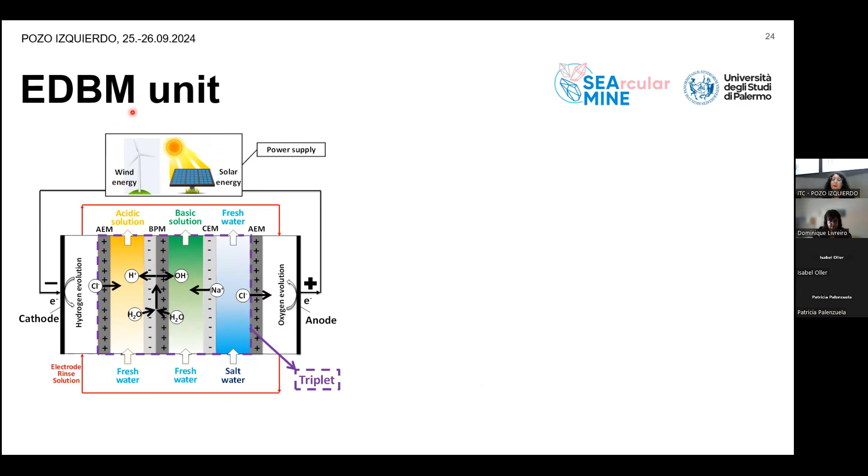In the repeating unit of the process, we have three channels and three membranes. Two of them are fed with fresh water that will become an acidic and an alkaline solution, and the third one is fed with a salt solution - a waste solution can also be used - and will be desalinated. Interestingly, the unit can also be coupled with renewable energy in order to reduce the consumption.

So in terms of the use of the EDBM unit, we can obtain at the same time both the acid and the alkaline solution we need. We can produce the solution in situ, which means promoting the circular approach in the treatment chain, and this can be directly recirculated in the unit.

This will also reduce the emissions. Of course, there will be some drawbacks. Among them, we identified the specific energy consumption that can be very high, the water consumption, because two of the three compartments are fed with water, and the membrane cost, especially for bipolar membrane, that is still very high. During the process, we try to address this drawback and try to optimize or minimize the consumption.

So the unit is very flexible. The process can be operated in a closed loop, recirculating the solution, in open loop, once through, and in feed and bleed by recirculating part of the outlet solution back and mixed with the inlet.

In terms of performances, this is just an example of one of the results we observed. We are able to produce a solution of, for example, alkaline solution at concentration that exceed 1 molar. That is what we need or more than what we need in the process.

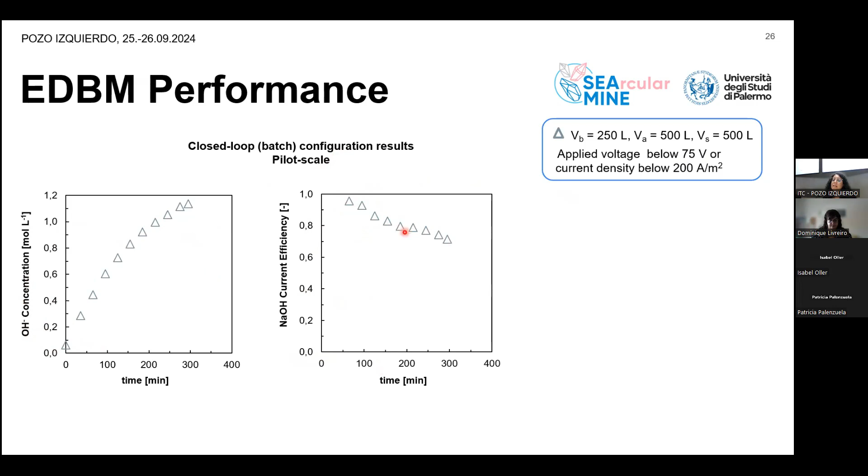In terms of efficiency, how efficient is the generation of sodium hydroxide with this technology? We were able to work at current efficiency close to 1, especially in the first part of the test in batch, and then current efficiency decreased to almost 70%.

And in terms of specific energy consumption, again, the trend is opposite, so it increased with time, of course, in a batch mode, but very low value, close to 1 or below 1, were reached when working at low concentration. So that means that actually EDBM can benefit of working at low concentration because you will have lower specific energy consumption, but also very high current efficiency.

During the process, we scaled up the units, starting with experimental tests in laboratory scale, by also develop and validate a model that was used to design the pilot that was then constructed. Here, a picture of the pilot.

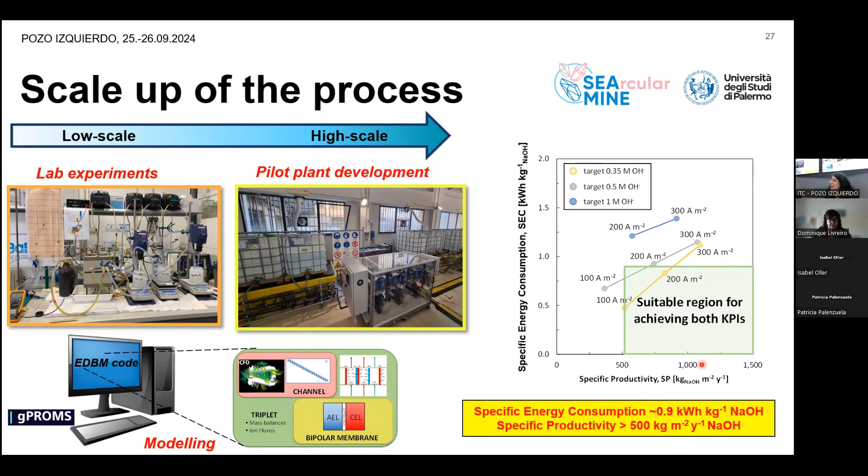And tested, of course. As a main result, during the different experimental campaign, we try, as I mentioned, to address the drawback. And specifically here, we can observe a suitable region in which the process should operate in order to reduce specific energy consumption that are related to operating cost and increase specific productivity related then to the capital cost, and that requiring a lower membrane area.

And with this, I will give the floor to Professor Michele again.

So just to continue this presentation, the other project that, of course, implements interesting schemes beyond state of the art in terms of brine valorization is the water mining project. Some of us have been involved in this project in different case studies. This is a very wide project with wide focus on different aspects: desalination, wastewater treatment, and both in the case of an industrial area or urban area.

And for this case, I will cut down this, but what I want to say that in the water mining project, one of the main case studies was in fact the implementation of seawater treatment chain with a specific focus on brine valorization. Let's say that the main focus, as we all know, is minimum liquid discharge. Minimum liquid discharge is an important aspect. So we want to increase, maximize the water recovery and minimize at the same time liquid discharge.

So the case was implemented in Lampedusa, as you see here, and we wanted really to take advantage also of the facilities that were available in the Lampedusa island. There was a thermal power station, so the possibility of waste heat availability from the power station. And on overall, the implementation of the chain was, again, to demonstrate possible scheme, possible circular scheme.

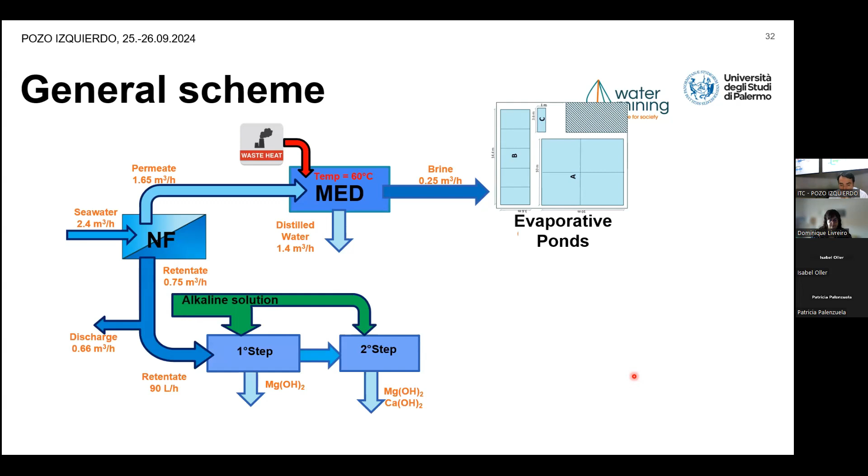But the brine then goes to a reactive precipitation step for the combined recovery of magnesium and a mixture of magnesium and calcium in the form of magnesium and calcium hydroxide. At the very end, we close the process with, again, bipolar membrane electrodialysis that is responsible for the production of the chemicals that are required. So this is a different scheme, as you see, with respect to the previous example, but again, we have this minimization of discharge, maximization of water production, and in situ generation of chemicals with minimum input from the external.

This is just the layout of the plants. We have very short time, but just to show you that this has in fact already been implemented and installed in this small island in the Mediterranean Sea.

Okay, key achievements. The main focus is on the nanofiltration, the multi-feed plug flow reactor, and the crystallization step for magnesium hydroxide. The data we collected show that performance was overall very good. Nanofiltration rejection was very high for magnesium, stability of operation was fairly good, and the operation of the crystallizers, which will be illustrated later, was also very satisfactory.

EDBM, as mentioned a moment ago, reached acceptable performance in terms of specific energy consumption. Also, the performance of the traditional MED unit under this special operating condition allowed us to significantly reduce the brine volumes, with a concentration factor up to 8.

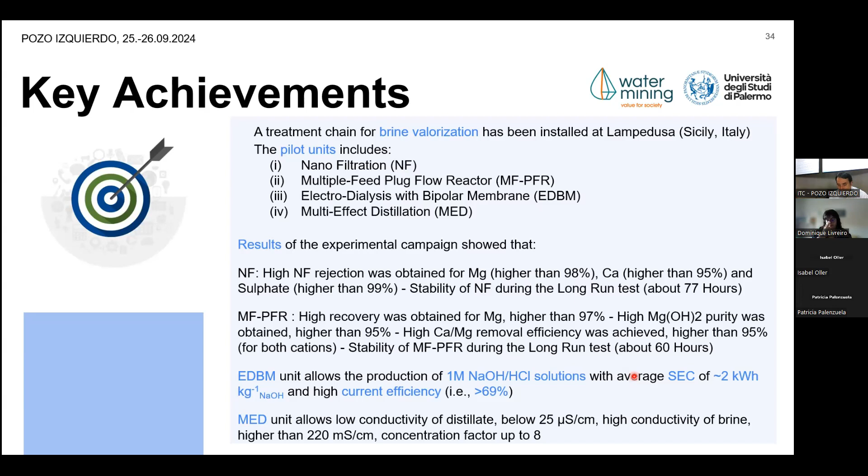Finally, I'll cut my presentation short to mention another ongoing project that, of course, involves many partners from across Europe. Like the Water Mining project, it is very broad in scope. Specifically, the main focus again is water - the value that comes from water, the value you find in water, from water, and through water. So there are a lot of different possibilities and opportunities.

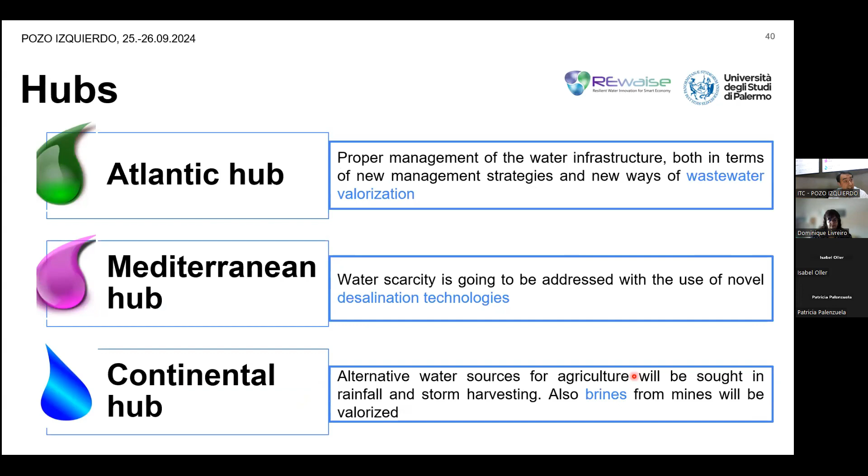For this minimum liquid discharge scheme, I'll ask my PhD student to say a few words, since I've been involved, I think, in Tenerife - you were saying that is the place of implementation - so if you can just briefly explain.

So this is the process description of the REWAISE project, but in particular we want to take the retentate from a reverse osmosis unit and concentrate it in solar ponds. A first pond in which we can recover calcium sulfate and calcium carbonate, and a second pond in which we can recover sodium chloride. After that, we have a solution with high concentration in magnesium ions, and we can treat it with alkaline reactant in order to produce magnesium hydroxide.

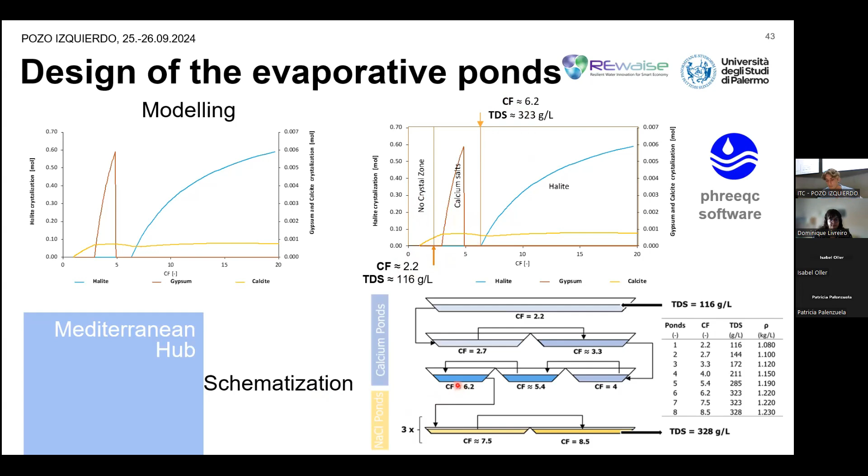This is a schematization of the ponds that we designed, and we operate these ponds in Tenerife. So we fill it with reverse osmosis brine, but also nanofiltration brine. And here we see the first crystals that grow.

I don't want to do a spoiler - this is for the next presentation. Ongoing activities for this project are the reactor operation and the salt production.

So just to conclude, I hope this overview of these different projects also provides inspiration for further solutions to this problem. But what's interesting, I think, for all of us is the fact that through a circular scheme, you can achieve a target for minimization of environmental impact, while at the same time creating interesting opportunities in terms of economic value. So the two things can go together.

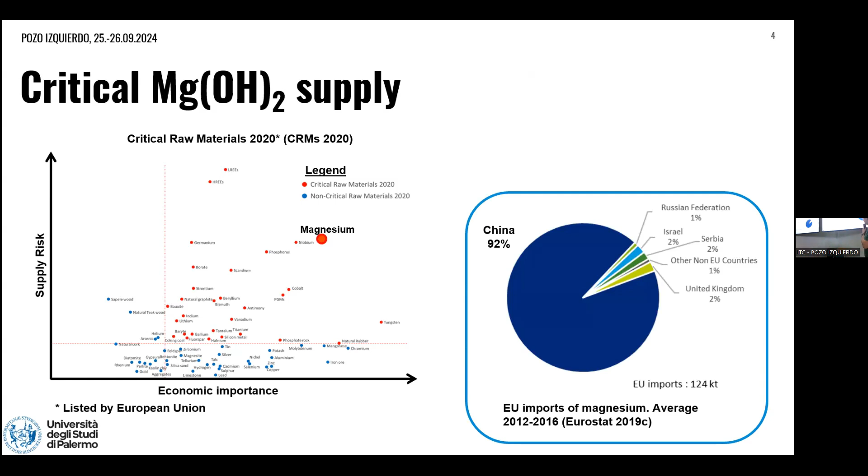Why recover magnesium, which is the most valuable of the two? Because magnesium has been declared a critical raw material by the EU, both for the very high supply risk and for its economic importance. About the first reason, that's clear from this graph: China is currently the main producer. They extract magnesium from mines, and it holds more than 90% of world production. So the EU doesn't want to be dependent on China for this raw material.

So we have done a lot of activities starting from the laboratory scale. Some of these slides were already shown in the first fast-track school, but I'm going to quickly repeat them for the sake of clarity. And we focus on, first of all, recovering purity.

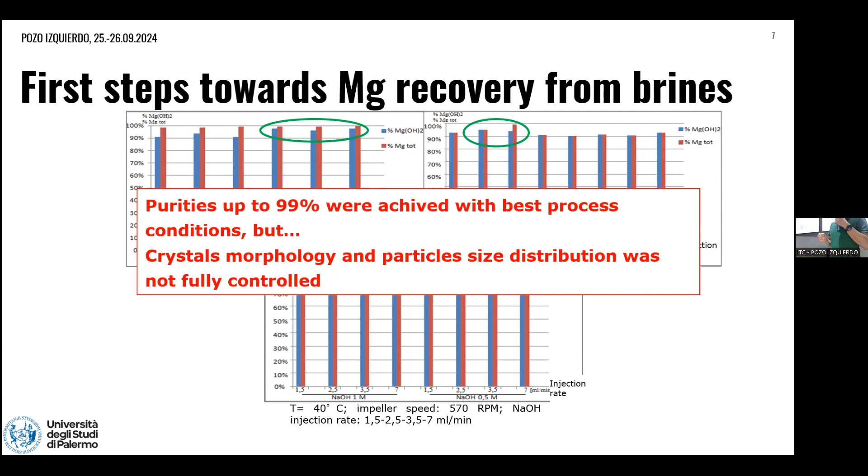I mean, you're not going to read the numbers, but what is important is that in many of the experiments carried out, we demonstrated to achieve 99% purity in magnesium hydroxide. In some cases it was lower, it depends on the feed, it depends on the operating conditions. But in all cases, what was more difficult was to control the crystals, morphology, granulometry, and particle size distribution. That was a main challenge.

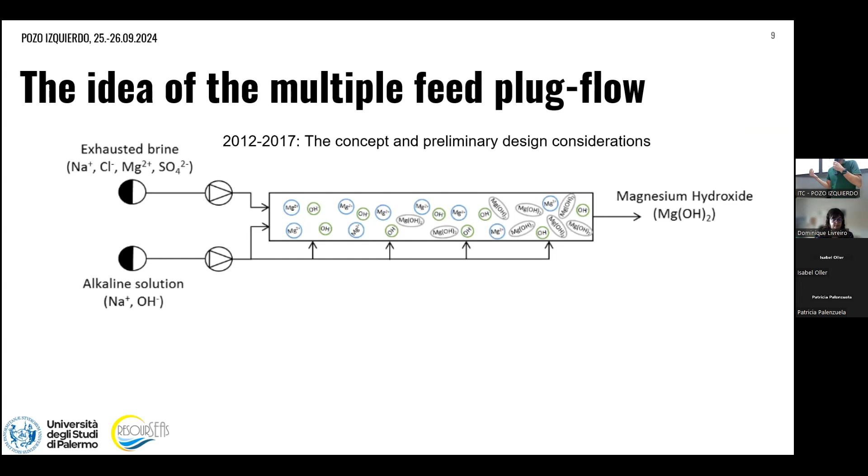Of course, we cannot think of producing magnesium hydroxide in a small laboratory scale reactor. So we have to think about a larger scale continuous reactor able to perform as well as the large scale unit. And the idea went to the multiple feed plug-flow reactor. It is a kind of plug-flow reactor, but instead of injecting all the reactants at the inlet, we distribute the injection of the reactants along the length of the reactor in order to keep lower supersaturation and slower crystallization, in order to allow crystals to grow in a more similar way to what we have done in the best condition in the lab.

So this technology was patented. We have a granted Italian patent and an extension which is under examination. And it also triggered the constitution of our spin-off company, ResourSEAs, which is now accompanying University of Palermo in this development. Of course, the company is looking more.

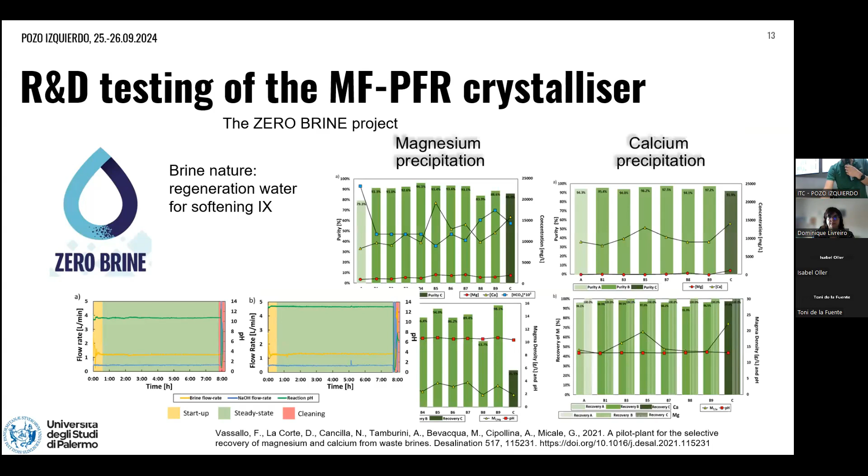The first real implementation example was within the ZERO BRINE project. The brine nature was a bit different from what we are demonstrating now. It is brine from regeneration water from ion exchange resin softening, so it's a brine very rich in calcium and less in magnesium. But the experience was positive. We could achieve very high recovery in both calcium and magnesium, but also quite high purity in the two products.

I will not stop there, and I will not stop even in the water mining, which was already shown in the fast track school. But just to say, in the water mining, as Giorgio said, we focused on seawater brines valorization. And again, the use of MFPFR reactor allowed to demonstrate in a continuous phase, for 8-10 hours of operation, that we can achieve very high recovery of magnesium, very high purity in magnesium hydroxide, and also very good removal of magnesium and calcium in total, with a calcium hydroxide purity which was a bit less because there is co-precipitation of calcium and magnesium at the end.

But now I want to go to the activities that we consider beyond the state of the art, because they are activities very recent, never published, and really pushing towards a different future of this technology application. The SEArcularMINE project was presented already by Rob. Within this project, we developed what we call a second generation MFPFR crystallizer.

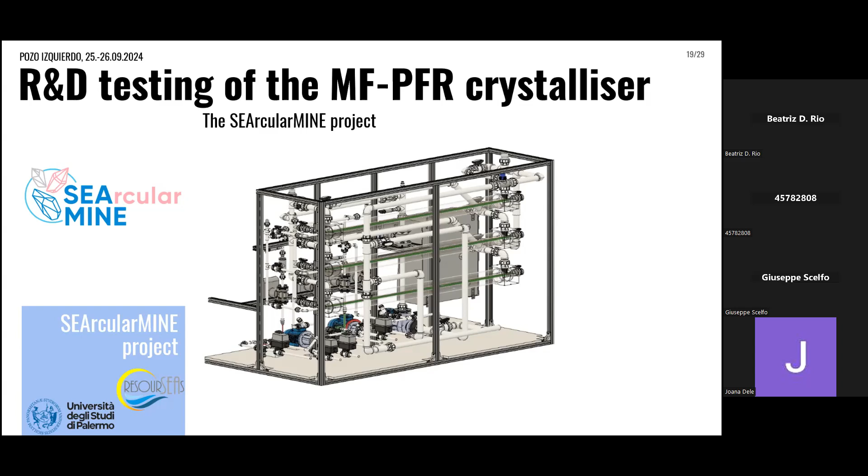The concept is very similar to what I've shown. There are differences in terms of residence time, for example, or some configurations that have changed in order to better fit with a different type of brine we are treating here. The bittern that we treat within the SEArcularMINE project contains up to 60 grams of magnesium per liter. Seawater contains 1.3 grams per liter, and reverse osmosis brine contains 2.5 or less. So we are treating a brine which is 20 times more concentrated than reverse osmosis brine. We needed to develop something different in that case.

And these are some pictures. People, apart from the technology, are important when we develop such projects. A picture of the crystallizer that has been implemented at Unipa premises, which is now at ResourSEAs premises in Trapani.

What I will show you are the results of two sets of tests to give you a kind of flavor of what it means to control the operating conditions. The first set of tests are tests with a very concentrated bittern, almost above 50 grams per liter of magnesium, and variable sodium hydroxide flow rates, leading to different pHs.

And the second set is very similar, but with a more diluted feed. We only have 24 grams per liter of magnesium in that case. It's worth mentioning that in all cases, calcium concentration is very low, basically almost not detectable, because within saltworks, calcium precipitates in the form of carbonates and sulfates.

What we will look at are the settling velocities, filtration rate, and SEM images. Why? Because these are the features that were more difficult to control in conventional crystallizers, and determine the economical viability of this application. Because if you precipitate magnesium hydroxide and you are unable to separate the solids from the liquid, then you cannot go to full-scale implementation.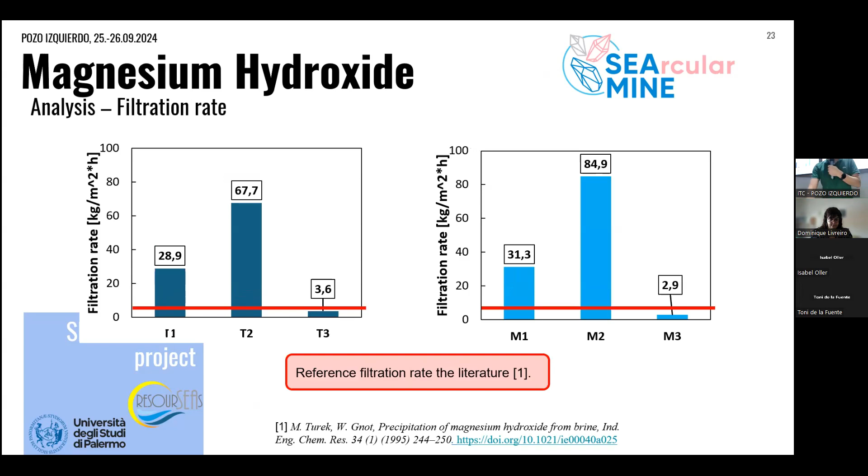Similar results can be observed also for the filtration rate. Compared to the reference filtration rate, we can achieve much higher values thanks to the new configuration, because values are higher, but also thanks to the optimization of the operating conditions. And again, operating with lower concentration solutions, you can achieve higher filtration rate.

Looking at the SEM analysis, is there a correlation between morphology of particles and settling rate or filtration rate? The answer is yes. As you can see, the central sample, the one that was showing the best performance in terms of settling and filtration, is also the one characterized by larger size crystals, larger platelets, while the worst one is the one showing the so-called cauliflower structure. It's a very well-known morphology of magnesium hydroxide crystal, but it is constituted by aggregates of very, very small crystals. Similarly, for the case of lower concentration magnesium, the best case is also the one with a morphology which is more similar to the best morphology we get in the lab, the platelet morphology.

Second example, and I'm going to call again Lorenzo, because he was one of the main actors in this story, is the implementation within the REWAISE project. In the REWAISE project, there was again a quite complex integrated treatment chain for the treatment of reverse osmosis brine, with solar ponds being the first units to further concentrate, but also precipitate sodium chloride and calcium in the form of carbonate and sulfates. But then, when we take a role for the reactive precipitation, this is the step.

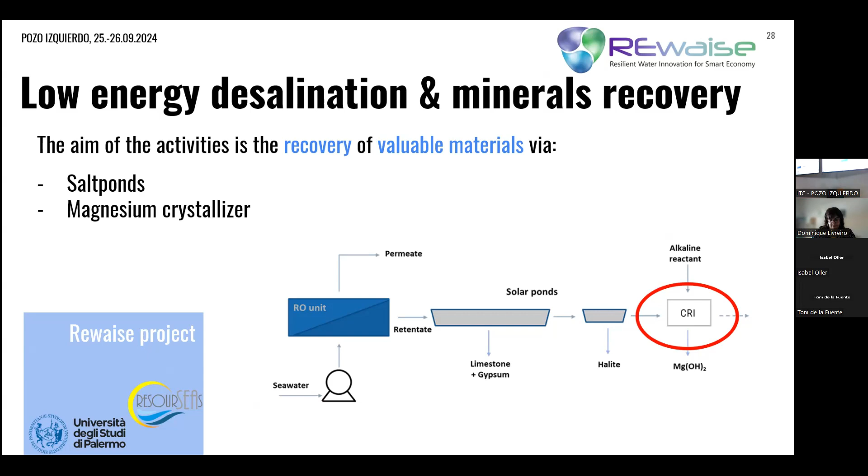Thank you, Andrea. I already talked about this slide, so no, okay. This is the first generation crystallizer that we use. This is a scheme of the reactor, and after a post treatment, this is the powder of magnesium hydroxide that we produce.

This is a master student, Vincenzo, during the installation of this reactor in Adeje, in Tenerife, the south of Tenerife Island. We did some tests with different brine and bittern. So the RO brine, nanofiltration brine, bitter, and bitter, after the concentration of the brine in the evaporative ponds. You can see the difference in concentration in magnesium: 2 and 3 for the brine, and 26 and 48 for the bitter. Really different, and also in calcium: 1.2 and 1.15 in the brine, but almost 0 in the bitter.

The first result is about sedimentation rate, and it's really different from the results that Andrea presented, because there is a different reactor. Here there is high sedimentation rate for the brine, because the magma density, so the concentration of solids in the slurry, is lower than in the bitter. There it is really not so fast.

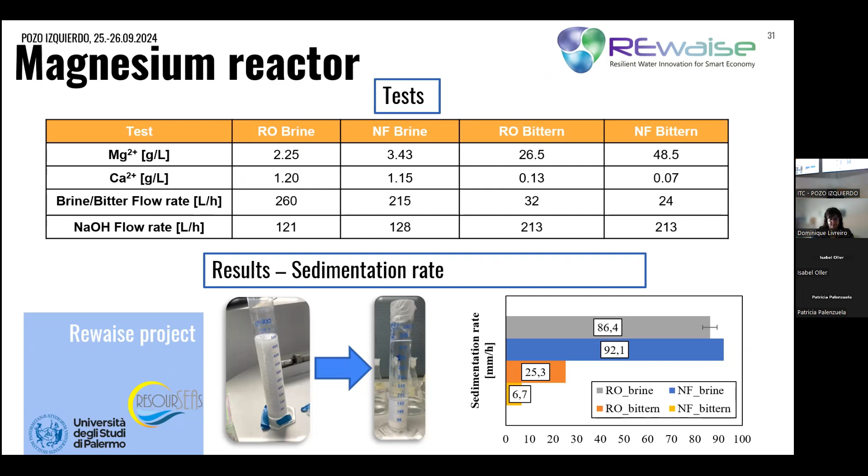Usually, the filtration rate and the sedimentation rate have similar trends, but not in this case, because there are different residence times of the crystal inside the reactor, and different fluid dynamics inside the reactor for this test.

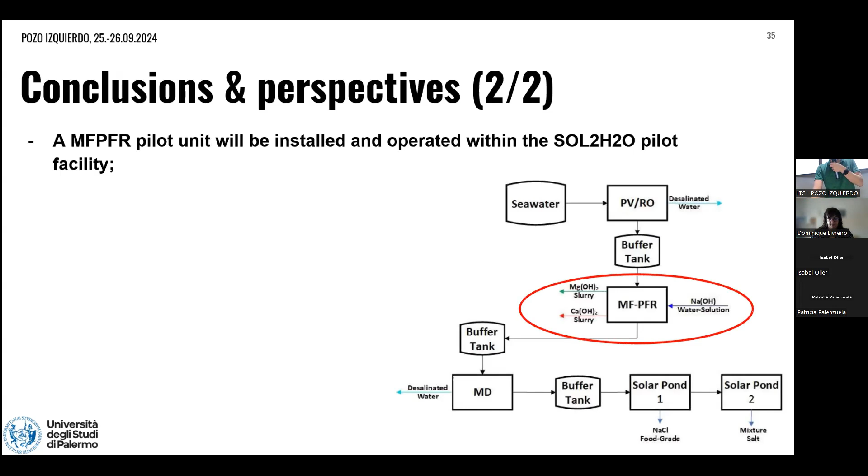What's next? Perspective within the SOL2H2O project. MFPFR pilot unit will be installed and operated in the pilot facility. It's a matter of weeks, no, Federico?

Then we will perform magnesium hydroxide precipitation tests from reverse osmosis brine. We will characterize the performance of the system, identify the optimal operating conditions within this treatment chain. And we will also focus on what was not discussed yet, so the second precipitation step to remove also calcium in the form of calcium hydroxide.

Assessing its efficiency, again, identifying best operating conditions. The final result will be to have recovered these minerals and to have obtained a bivalent-free brine that will be ready for MD concentration and then salt production afterwards. Thank you.

A question? Well, this is a question probably for Lorenzo.

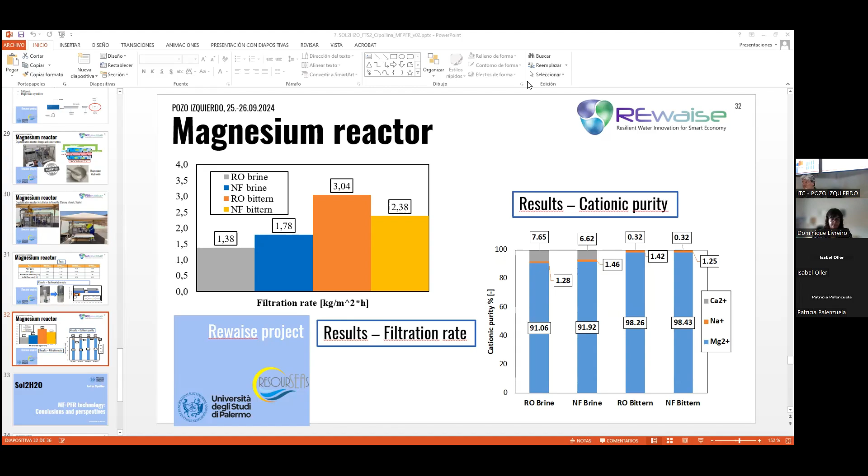Thank you very much. Any more questions? So one more, related again to my first question - have you found from the literature some of the competitors that you have?

In the literature, there are mostly laboratory scale analyses performed with conventional stirred reactors, and typically the main issue is separation. So in the graph I showed, the reference values of settling velocity or filtration rates are much lower than what we can get. There might be industrially relevant cases where companies have developed their own technology, but this is not openly accessible in the literature.

There is an American company, Martin Marietta, that produces magnesium hydroxide from seawater. We don't know exactly the technology, it's probably a conventional reactor with huge settlers. What we know is that the quality of their product is very low, so they sell it, but for low-grade applications.

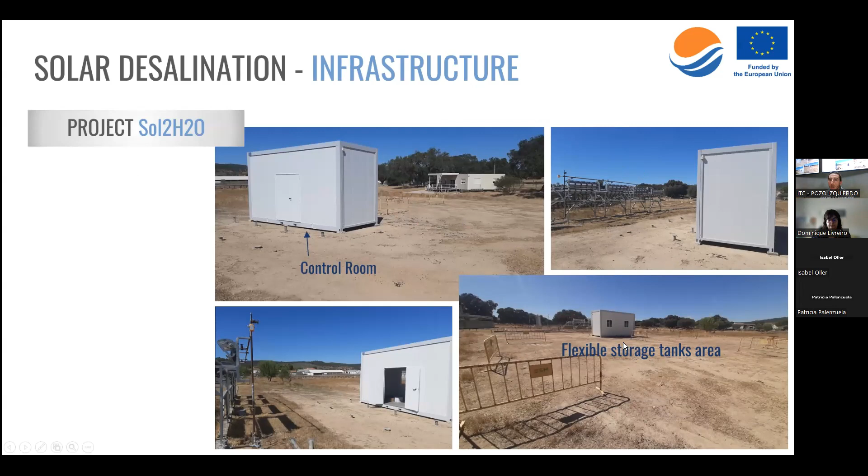So this will be the flexible storage tank area, which is already emptied and ready to place the flexible tanks, and this is the location.

So here, as you can see, I have already described the heat supply, the control and operation room where all equipment will be inside, the PVRO, the MFPFR, and the MD unit. This is some of the main components we already have at the site to start implementing the hydraulic connections and hydraulic circuits.

So the first stage will be the PVRO, as the first presentation showed the system. The brine from here will be used to feed the MFPFR units, and the brine from the MFPFR unit will be the feed for the MD unit. The brine that results from the MD unit will be placed into evaporation ponds.

The model we have in our facilities is this one from AKSEP. The membranes are FilmTec membranes. Some of the characteristics: power consumption is 2.2 kilowatt-hours per cubic meter. The production capacity is 11,000 liters per day, but we will just work at 1,000 liters per day.

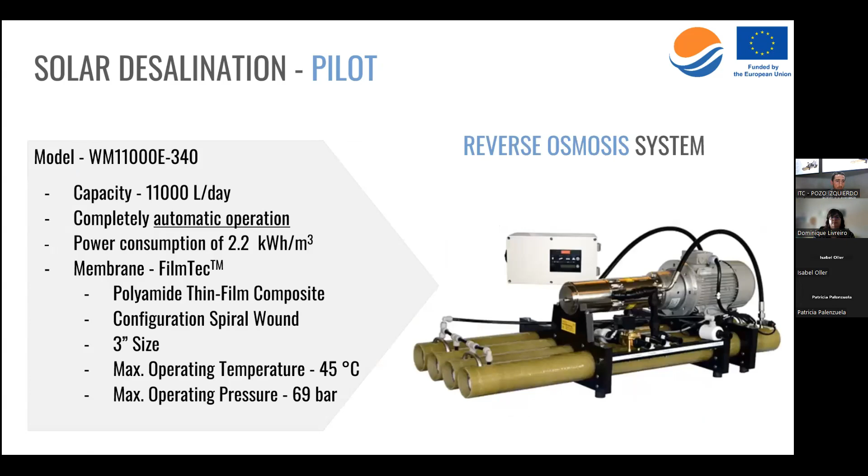Okay, so thank you so much, Federico. You're welcome.

So we have arrived at the last presentation. This presentation will be given by our colleague Maria Elena Novais from University of Évora. The title of her presentation is Solar-Driven Wastewater Treatment, Pilot Plant Installed within the Sol2H2O Project.

So, Elena. Thank you, Tony.

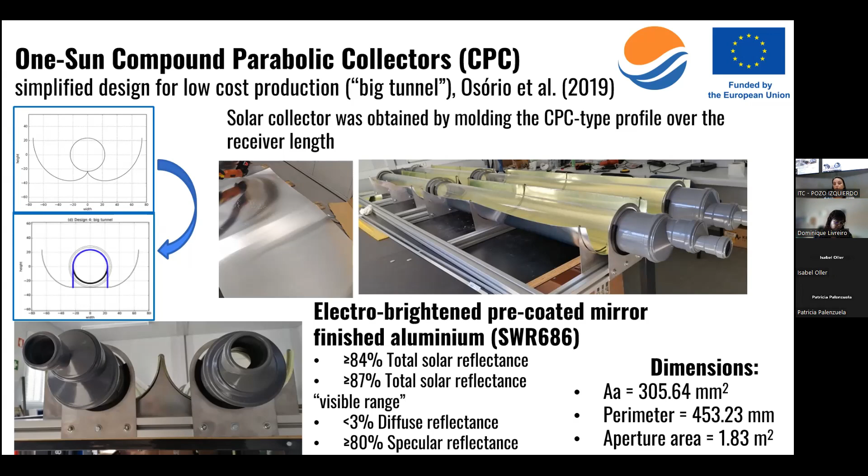In terms of the receivers, this is the second innovation in this photoreactor. These receivers are tubular, horizontal, connected in series, and we have 4 tubes. They are made of borosilicate glass, Duran, with 125 millimeters outer diameter. The length is 1.5 meters each, and the valves and tubes are made of high density polyethylene.

The innovation is also this higher diameter of the tubes, much higher than conventional ones, which have historically ranged between 30, 50, up to 75 millimeters in diameter.

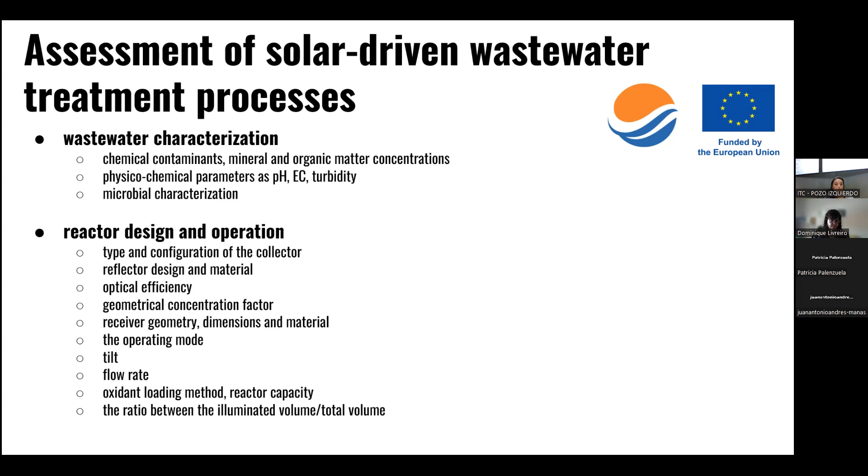And then the operating mode: this reactor operates in batch mode. The tilt is inclined at 40 degrees. The flow rate, as I said, it's going to range, and this is a parameter that we are also going to assess to see which are the optimal conditions for this specific photoreactor. The oxidant loading method depends on the process we are using. In our case, we are just starting to test this reactor using a conventional approach, and to compare with the state of the art, we are using heterogeneous photocatalysis with commercial P25 titanium dioxide at varying concentrations. This ratio between the illuminated volume and total volume, in this case, is 0.41.

Another characteristic is the characterization of the advanced oxidation process. This is the one that I was already explaining. In this case, we are just using heterogeneous photocatalysis.

And then, of course, what is the point of characterizing all the components of a solar photoreactor without knowing if it works? So to see this, what we want to know is the total degradation time, because when we want to treat higher volumes, we want this treatment to be as fast as possible to allow us to increase the amount or volume of treated water.

Also the total organic carbon and the chemicals and contaminants removed. One important aspect, especially when dealing with real wastewaters, is the toxicity of degradation products, because sometimes we can break the molecules, but the degradation products may be even more toxic than the parent compound. So in this case, we usually also carry out some ecotoxicological analysis.

Then another important point is the microbial inactivation and also the energy consumption per volume of treated water. And at the last step, the economic assessment, both in terms of CAPEX and OPEX, and also the specific treatment cost along the system lifetime, which in this case should be around 10 years.

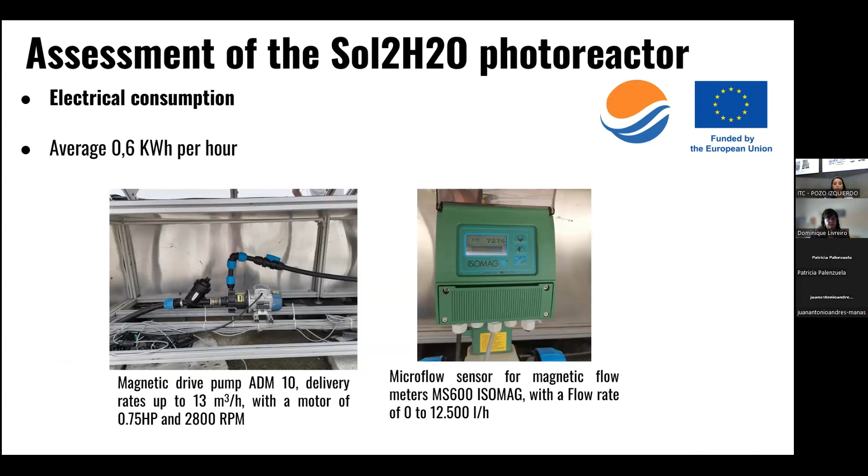But the good thing is that there is not such a big difference between the lower concentrations and the maximum. So it seems that our hypothesis, that by increasing the light path length we can reduce the concentration of catalyst used, holds. For comparison purposes, we also use another parameter, the UVA accumulated energy over time, which allows for better comparisons than just time.

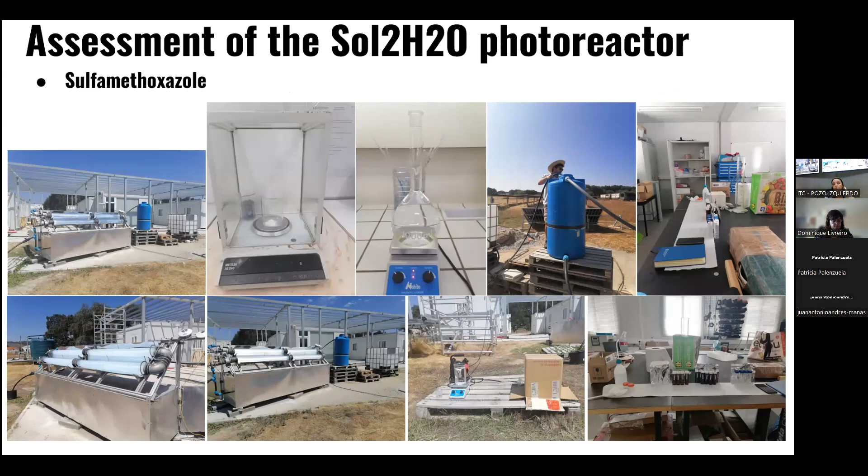But here again, and it's even more clear than in the case of phenol, there is not much difference. For instance, with 25 milligrams per liter of titanium dioxide, we reach a conversion rate of 74%, up to when we use 200 milligrams per liter, reaching 84%.

So what we need to do now is understand what is the optimal catalyst concentration for this kind of photoreactor, because the aim in this case is also to reduce the concentration of catalyst, since it is very expensive when carrying out these wastewater treatment processes.

If we want also to upscale it to a commercial scale, we need to know what the costs involved are, so we need to carry out an economic assessment. These are just the first data related to the construction of this reactor, and the estimated costs for 1 cubic meter of treated water would be around 11,800 euros.